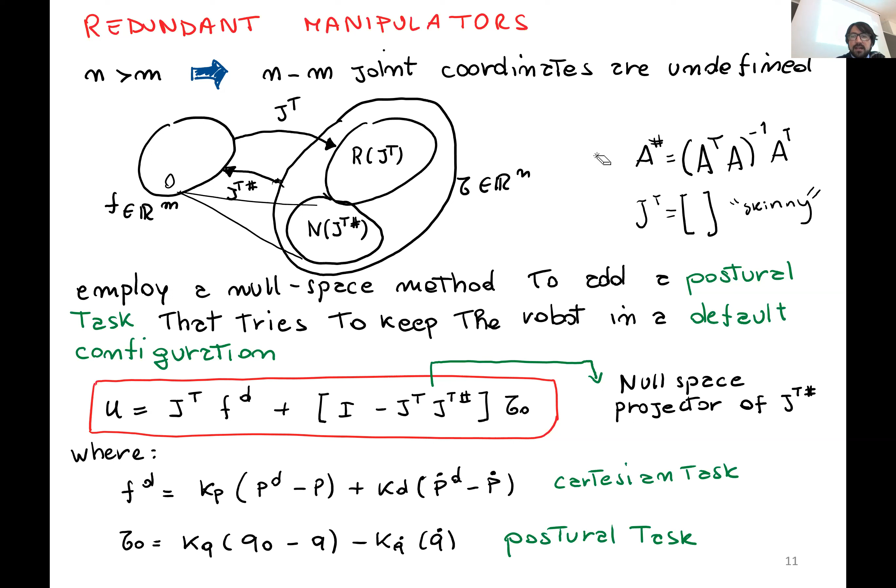Yesterday I showed you the pseudo inverse, but I made a small mistake with the one I showed you. I showed you the right pseudo inverse, which is correct if you're getting the pseudo inverse of J. But since J transpose is skinny, it's a tall matrix, then the pseudo inverse is the one you see here. So it's a left pseudo inverse.

And the way you realize this is because the column rank, the rank of the matrix, needs to be full. So it needs to be a tall matrix, and it's a left pseudo inverse because if you add an A here, then it needs to be full rank, otherwise this expression is not invertible. If you add an A here, you get the identity expression back. Sorry, let me close the door.

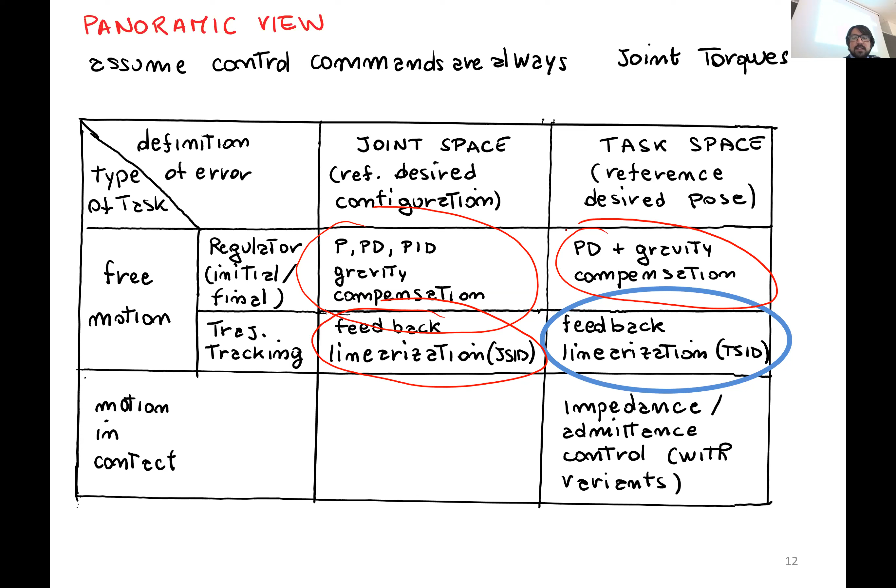So going back to our panoramic view, we already saw the PID family plus gravity compensation of controllers in the joint space, also the feedback linearization type of controllers in the joint space. And we saw yesterday up to the PD plus gravity compensation in the task space or Cartesian space. So today we're going to be talking about feedback linearization in the task space.

Remember that computed torque control is a specific type of feedback linearization for mechanical systems in Cartesian space. So we're going to work out the equations for computed torque control in Cartesian space. Let's go back to our joint space dynamics.

Here I'm not writing explicitly the dependency on Q and Q dot of matrices M, H, and our controller, just for simplicity of the procedure we're going to do afterwards, and because by now it should be obvious that they do depend on Q and Q dot. Let's start from the assumption that the number of task space variables is the same as the number of joint space variables. This means there's no redundancy in our manipulator.

First, what we need to do to achieve the inversion in the task space is consider the behavior of the manipulator at the end effector, in terms of the Cartesian dynamics.

So let's start from the definition of our transformation from joint space velocity to Cartesian or task space velocity through the Jacobian. If we derive this again, we get the acceleration of the end effector in the task space. Remember that we have the chain rule, so we have two terms here.

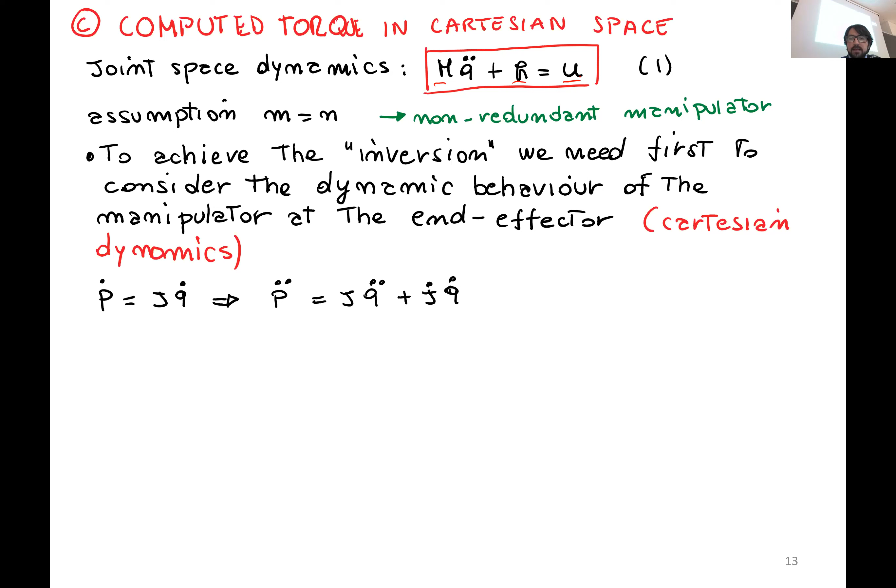And from here, we can actually isolate q double dot, the joint acceleration vector. Furthermore, we can use this expression to replace q double dot in equation 1 here on top.

Once we do that, we get this expression for our joint space, from our dynamics equation now. And we're going to start doing some algebraic manipulations such that we get to a specific expression that will make evident how the joint space matrix and the nonlinear terms behave in relation to the end effector.

So first we're going to left multiply by J inverse transpose. Here it's important that I mention we are allowed to get the inverse of the transpose because we have a non-redundant robot, so M is equal to N, J is a square matrix, and J furthermore is non-singular. This is only possible in cases where you have a non-redundant robot. So if we do the left multiplication of J inverse transpose, we get this expression here.

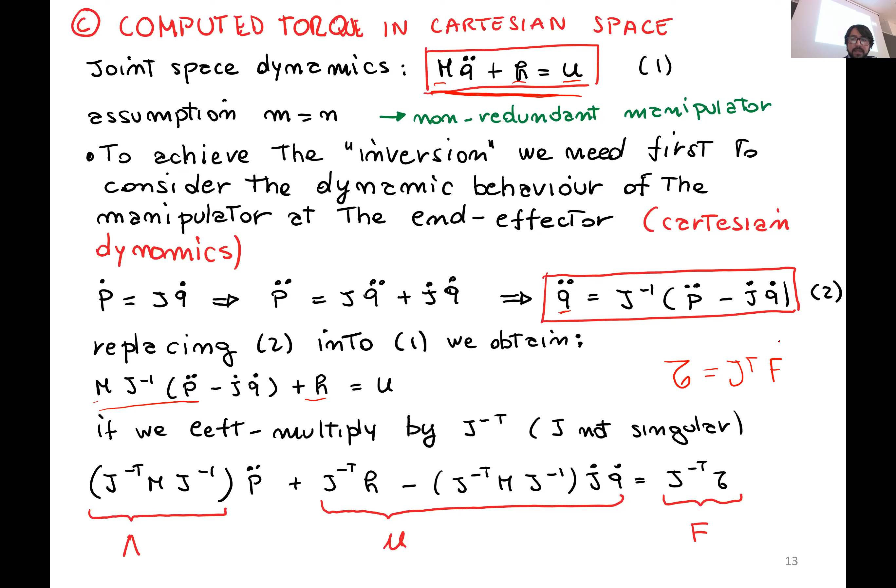So we have this expression here, which is basically just replacing with the terms. Now here we're making explicit the dependency on Q and Q dot. And this equation shows us the dynamics reflected at the end effector level.

This capital lambda, which is this matrix product, is the Cartesian inertia, which is basically the joint space inertia seen or felt at the end effector. Again, keep in mind that capital lambda will become singular if J is singular as well. This means that there's no inversion of the Jacobian, and this is the case for redundant robots.

Then we have this vector mu, which is the vector of Cartesian bias terms, the equivalent of the vector of nonlinear effects in the joint space, only for the Cartesian space. And then we have F as the Cartesian force. Remember that we're considering P as a Cartesian position in space. Later next week, the professor will do a lecture on orientation control. For now we're just focusing on position.

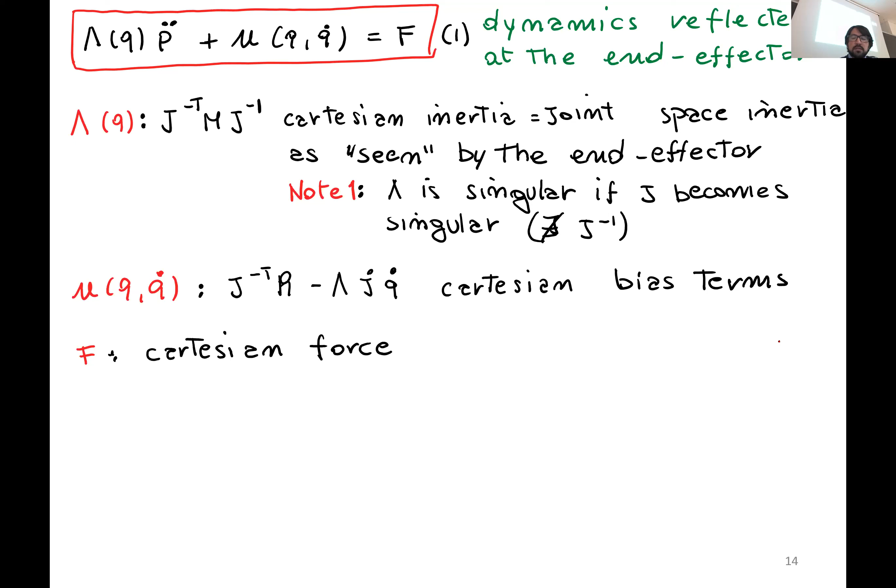So now that we have this dynamics expressed in terms of the end effector, we can apply the feedback linearization. And if we choose F to be the approximate Cartesian inertia matrix times an additional input called V, plus the estimation of our mu vector of bias terms, we now assume that we have perfect knowledge of lambda.

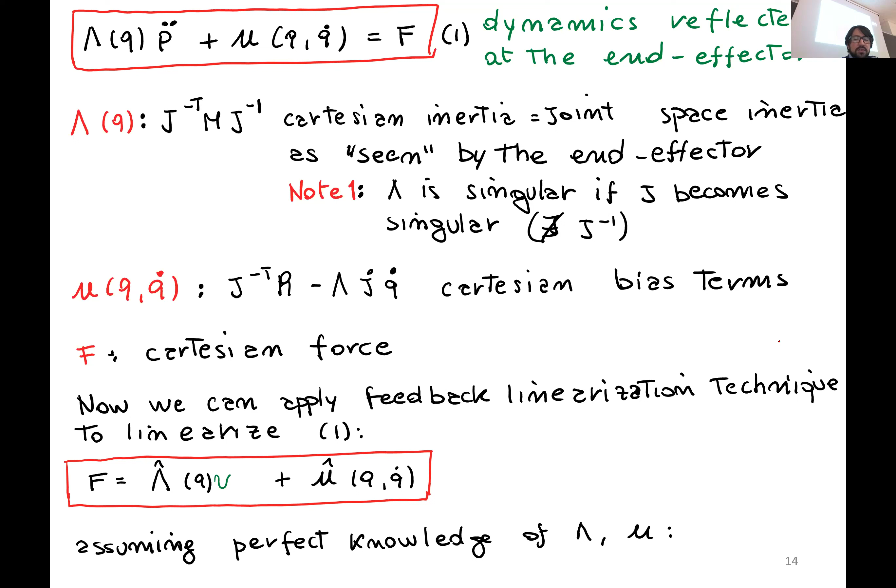These are our closed loop dynamics. And now, since we're doing feedback linearization, these two terms go away, they become zero. And then in the end we obtain this expression, which is a linear system, a series of double integrators.

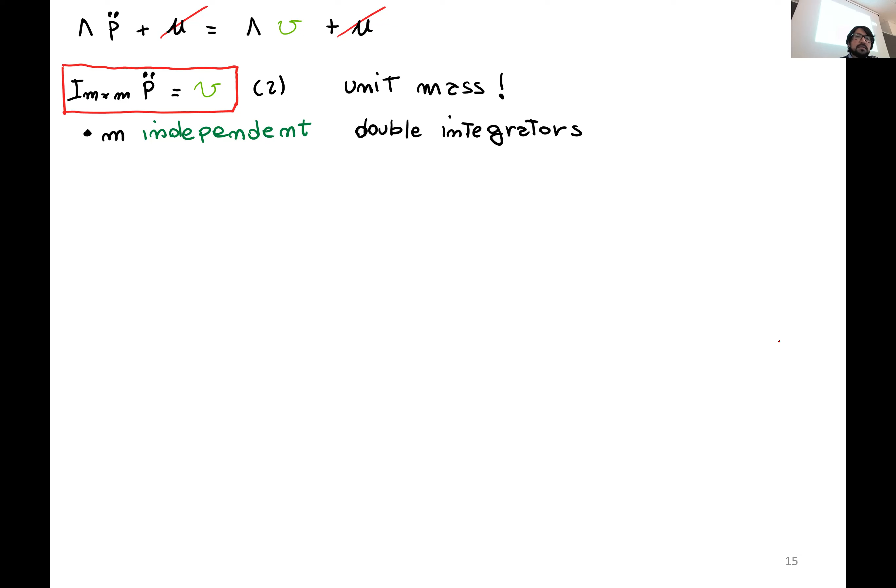Similarly to the ones that we found in joint space, and they are independent and they are unitary mass, as we saw also in the case of the joint space.

So as we did in the case of the joint space, we can design a stabilizing controller to reduce the tracking error in all of the double integrators. The main difference is that the size of M is the size of the task space now, and we're going to design a controller for all of the coordinates in the task space.

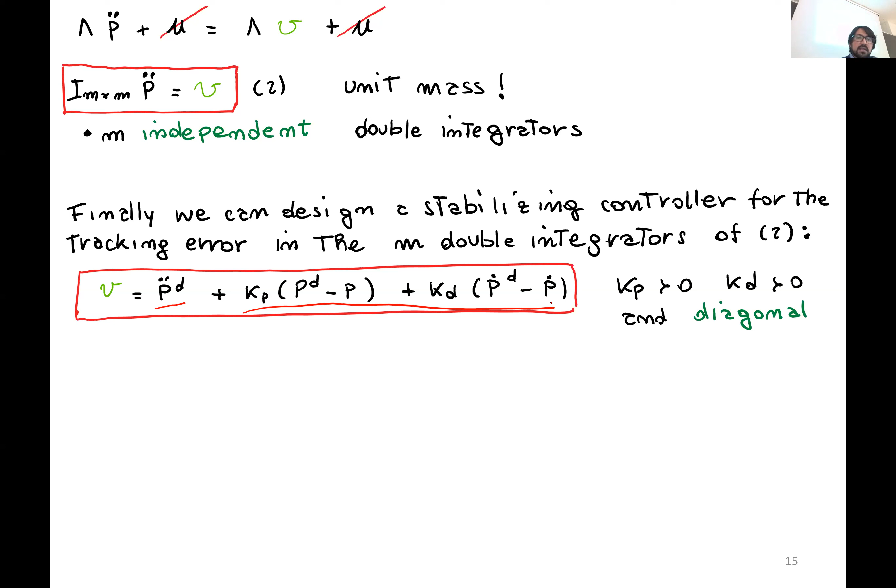And this is how we define, similarly to the way we did in the joint space, our control action with our desired acceleration and our PD term now in Cartesian space. And again it can be proven, you can prove stability in the case where Kp and Kd are positive definite matrices. Remember that P is a vector, so Kp and Kd are matrices which are positive definite and diagonal, so that you have a control independently for all the coordinates in the task space.

So this results in the closed loop dynamics, as you see here on the slide, which turns out to be the error in the acceleration plus a derivative term, a proportional term, and a derivative term here. And we're going to call this error E of X, EX, which is the Cartesian tracking error.

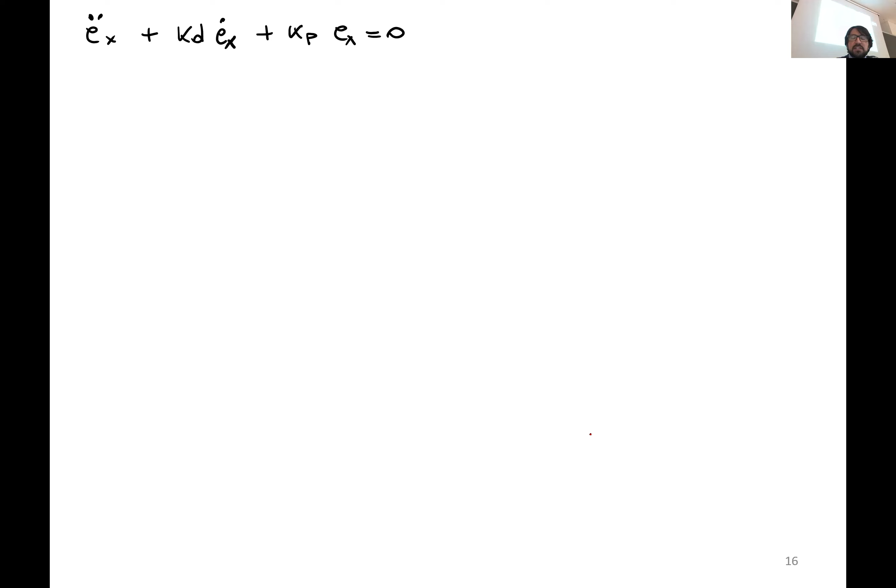So let's write again our equation now in terms of our Cartesian tracking error. And we can prove that this is stable in the case where Kp and Kd are positive definite matrices. And just as a general reminder, you can prove this using the second method of Lyapunov, and then you can only prove stability with Lyapunov.

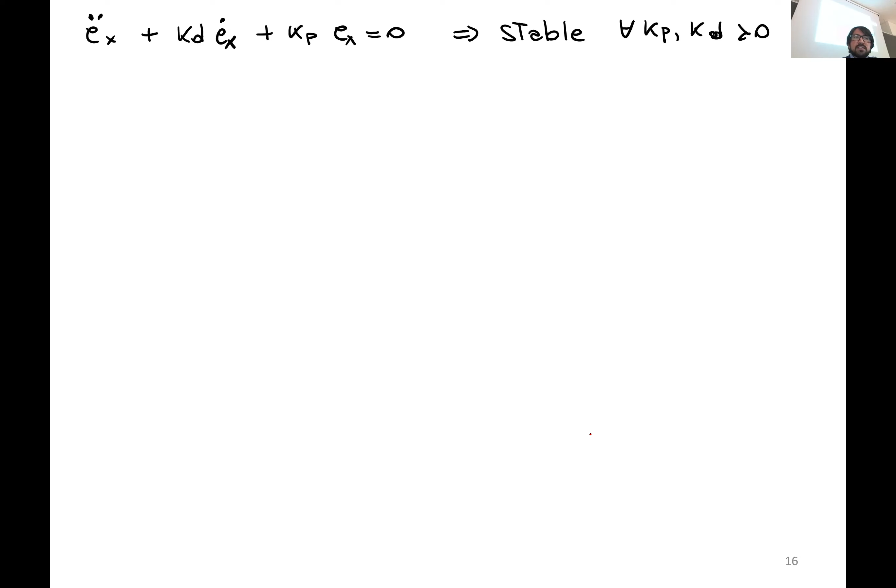You cannot prove asymptotic stability, because in the end, in your Lyapunov equation, you're going to get that the derivative is going to be negative semi-definite. So in order to prove asymptotic stability, you need to use LaSalle's invariance theorem, in case you're curious about it.

So the final control law turns out to be this one, which is our estimation of the Cartesian mass matrix, Cartesian inertia matrix, multiplied by our V, which turned out to be this term here with the proportional derivative action, and then our compensation for the nonlinear terms here, always using the current joint states that can be measured. We're missing a dot here, I just noticed.

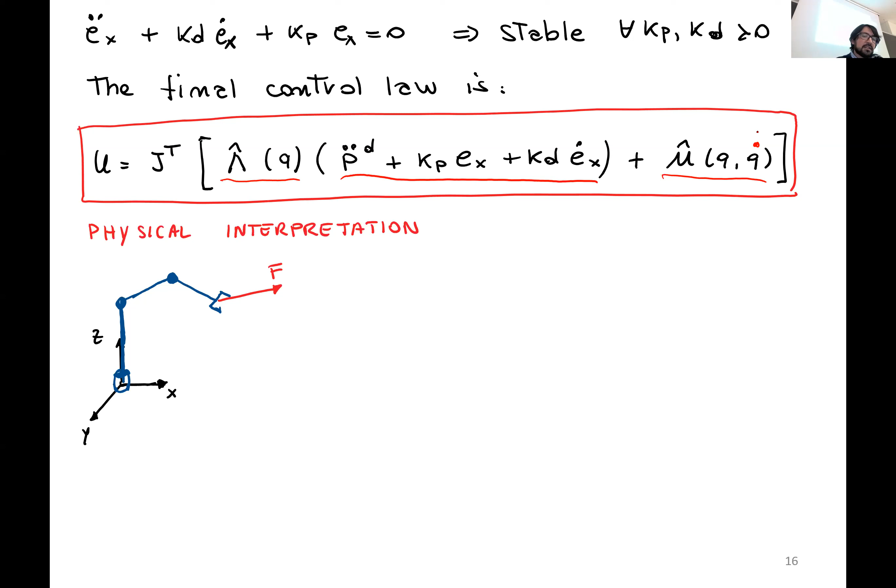If you don't use an approach in the task space that gets rid of the nonlinearities related to the task space, what's going to happen is that the inertia at the end effector is going to depend on the configuration of the robot. So it depends on the value of Q, and it's going to be variable in the Cartesian direction. So at the end effector, you're going to have different inertias in the X, Y, Z directions.

This is related to what we were discussing yesterday with the professor, that you're controlling basically with springs at each of the joints. Even if you get rid of the coupling, this inertia that you feel at the end effector is going to feel different depending on the position or configuration you're at. So if you apply a force in a specific direction at the end effector, it's going to accelerate in a different direction than the one you're pushing. In general, it might be the case that your manipulator is in a certain configuration where the resultant is in the direction you're pushing, but in general it won't push in the same direction.

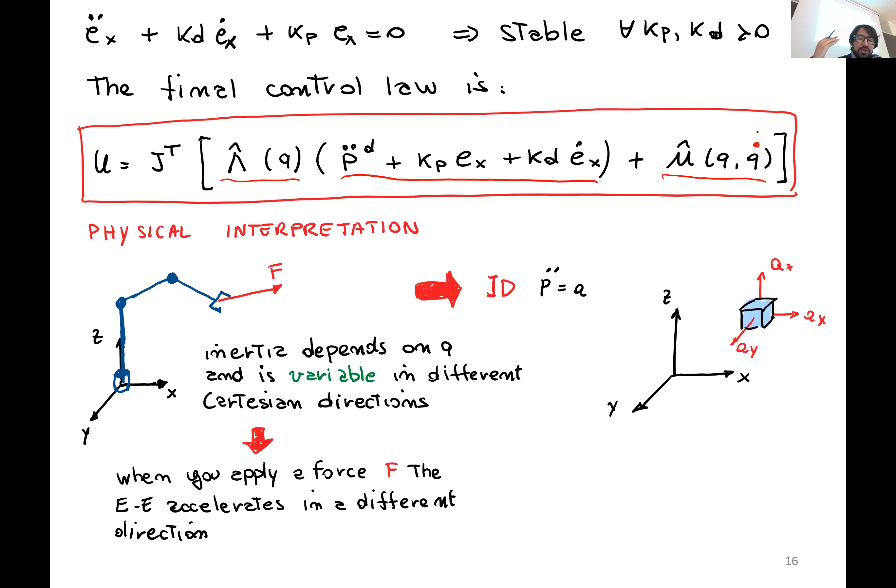Now remember that we mentioned that when we do the inverse dynamics or computed torque control, so when we do the feedback linearization, we get a unitary mass. Basically what we mean is that you get a mass at the end effector level with unit 1, and when you push that mass in a specific direction, it's going to displace in the same direction you're pushing. This is because you're compensating for the dynamics at the Cartesian level — I shouldn't say getting rid of them, you're just compensating for them in the control action.

So now let's see the case for redundant manipulators. We are in the case where you have more joint variables than task space variables, so our Jacobian is going to be a rectangular matrix, specifically a fat, long matrix. And of course we know that if the matrix is not squared, the inverse of the Jacobian does not exist.

So we can obtain an input-output decoupling, or linearization, or an input-output decoupling of our task variables, and also a linearization, but not for the entire state vector, if we replace our inverse transpose with the pseudo inverse of the transpose.

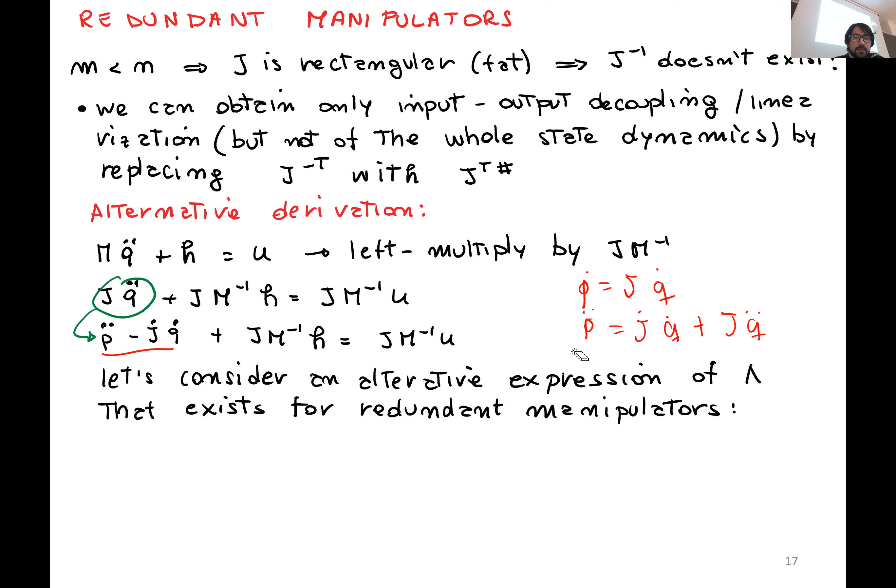So we now consider an alternative expression for capital lambda, and this one exists for redundant manipulators, which is this. We can say this exists because we're only taking the transpose of the Jacobian matrix, and this inverse is only defined if the Jacobian needs full row rank. So this is also something you need to take into account. This is our new definition of capital lambda. So if we left multiply our dynamics by lambda, we get this expression here.

So we have lambda multiplied by the acceleration, then you get lambda multiplied by the derivative of the Jacobian times the joint velocities, and then you get lambda times the Jacobian times M inverse, which is equal to what you see on the right hand side of the equation.

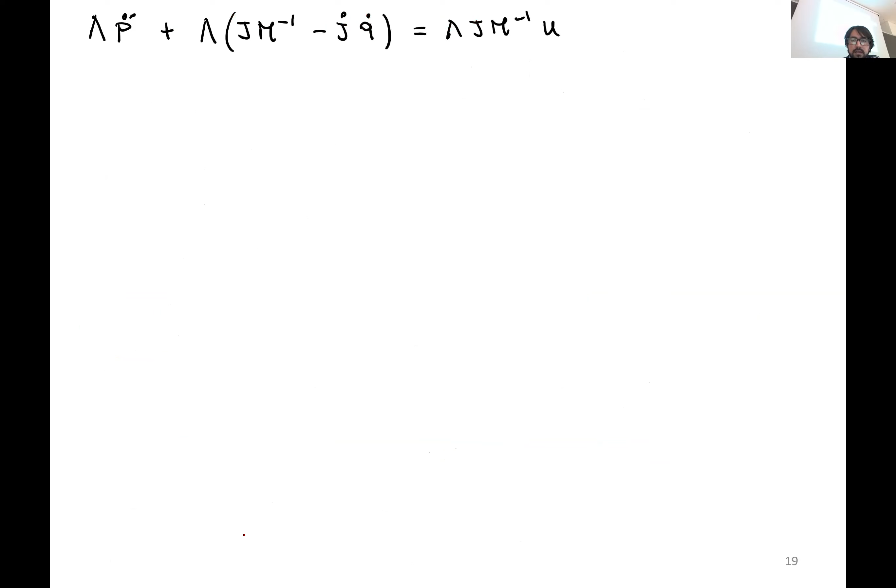So here we're rewriting again the same expression as at the end of the previous slide. This is our vector of bias terms, and lambda, it's the same as in the case before. It's our Cartesian inertia. And now let's take a look at what's on the right hand side of the equation.

Remember that lambda, we define it as this, as the inverse of the multiplication of these three matrices, and then I'm just writing J M inverse.

Recall that J transpose is a skinny matrix. So to take the pseudo inverse of this one, we need to use this expression. This requires that J transpose is full rank, full column rank. So in order for J transpose to be full column rank, J needs to be full row rank. And this is the left pseudo inverse of A.

This is called left pseudo inverse because if you multiply it by A on the right of the transpose, then you get identity. So let's write the left pseudo inverse of J transpose, and this is what you get: J times J transpose inverse times J. If we do this multiplication, you can already see if you add the J transpose on top, what we have here is identity.

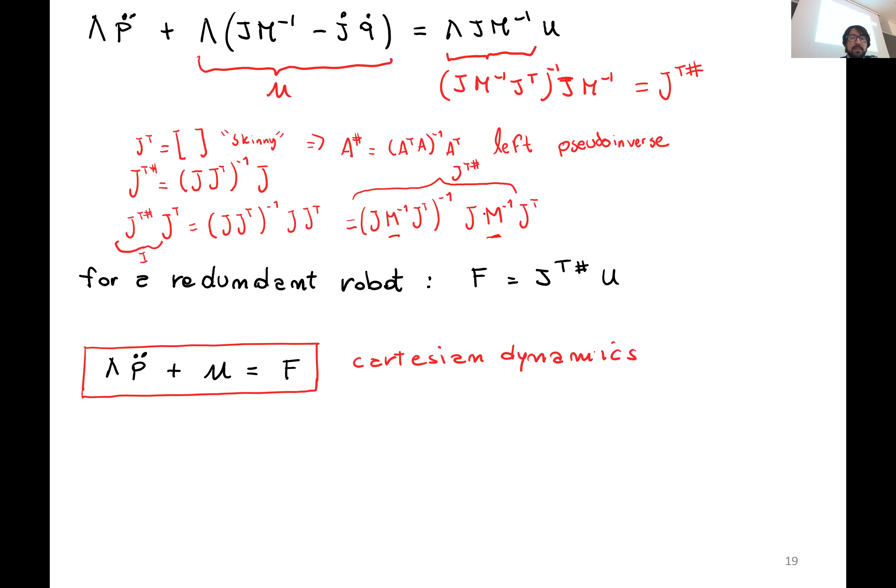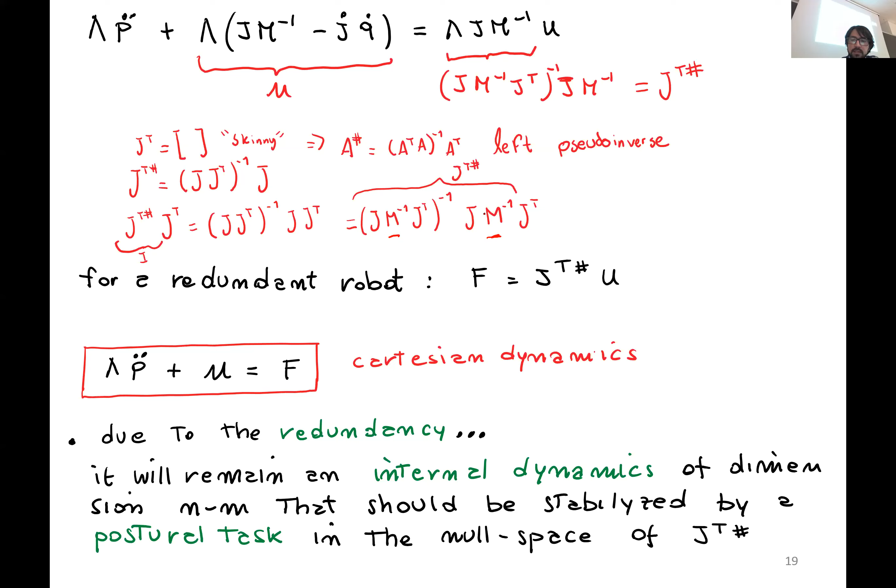And because we have redundancy, there's going to be n minus m joint torques that need to be stabilized with a postural task using the null space of our J transpose inverse matrix. So we use the torques that do not generate any force at the end effector. If you don't have any force at the end effector, there's no motion caused by those joints at the end effector level to control the redundant degrees of freedom.

So mainly what we want to do is find the portion of U that is in the null space of our J transpose inverse matrix. And what we mean by this is finding the input vector of the size of the joint space, so it's n, such that its transpose pseudo inverse times our input goes to 0. So this means that it doesn't generate any force at the end effector.

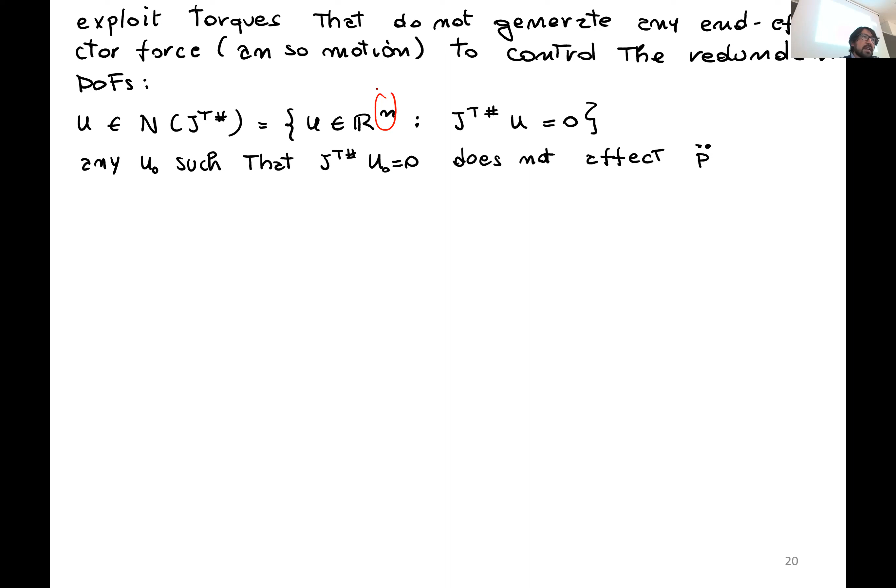So just giving it a name, U0, it's going to be the torques that when you multiply them by the transpose pseudo inverse, would not generate any acceleration at the end effector. So we break our control input into U plus U0. And what we want is that when you multiply this U plus this U0, at the end, you're going to get the same J transpose pseudo inverse U.

So we can use our null space projector, which is this one in this case. Remember that this is not identity because J transpose is skinny, and it's a left pseudo inverse. So just bear that in mind. And here we add a UP, which is going to be our input for a postural task.

So let's verify that J transpose pseudo inverse times U0 is equal to 0. If we multiply J transpose pseudo inverse by our U0 input, what we get is this expression here: J transpose pseudo inverse minus J transpose pseudo inverse times J transpose.

Because J transpose is a skinny matrix, this becomes identity. Then inside the parentheses you get J transpose pseudo inverse minus J transpose pseudo inverse, which is 0, multiplied by our postural torques control action, and this is 0. So we verified that we don't generate any force at the end effector level with this control input.

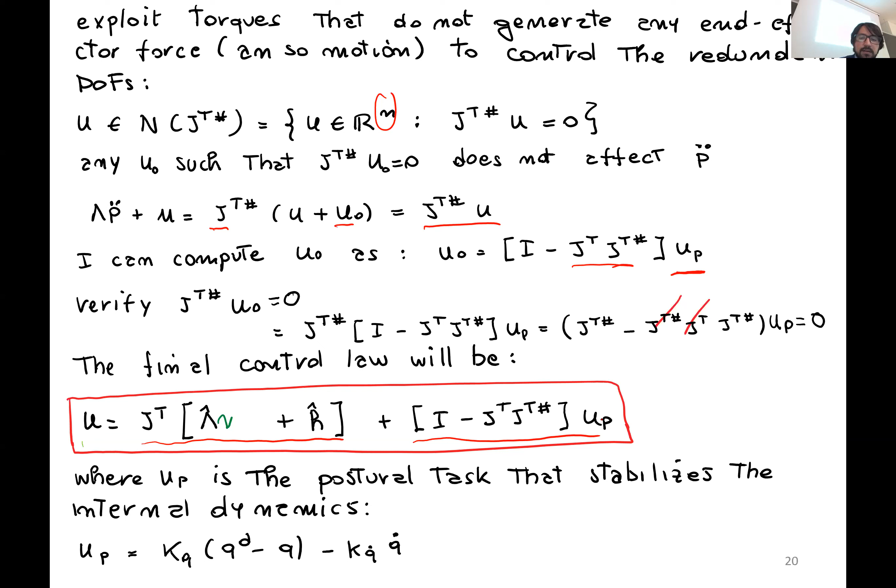And then we have here our postural task controller, which is using the joint torques that are not generating any motion at the end effector. As I repeat, UP is the postural task that stabilizes the internal dynamics of the robot, and we can define it like this, which is a PD action for the joints that are being projected by our null space projector.

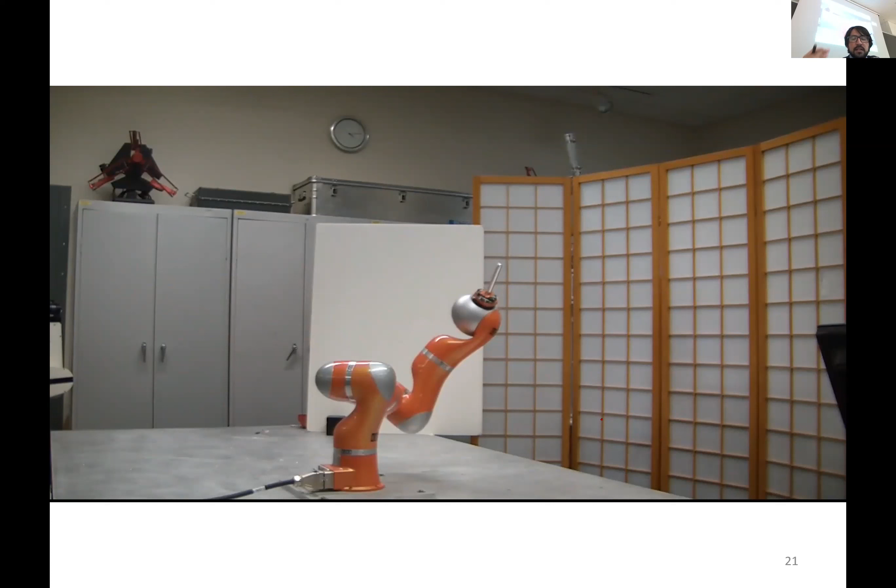So I'm going to show you a couple of examples. In this one, they're using the null space projector to generate a postural task, but they're also extending this to consider joint limits, so hard constraints on the joints. They're coming with a kinematic trajectory in a task space controller that follows a trajectory but also has a postural task.

So here you have the robot tracking a trajectory, and you see that in a certain way it's trying to keep the posture, but it also takes into account its kinematic limits. Then it's just repeating the motion, the circular motion here, and it should come to a stop now.

This is work from University of La Sapienza in Roma, from a former student of, well, a former collaborator of Professor Alessandro De Luca and Oussama Khatib. Then we have this other example in which the robot is commanded, the end effector is commanded to stay in place.

In this controller, what they're trying to extend is that at the end effector level they can differentiate between torques applied at the end effector. For example, if you're doing a machining task at the end effector, like polishing or finishing a small part, in general when you collaborate with humans, the human does the polishing and then uses the robot to relocate the part so that it fits.

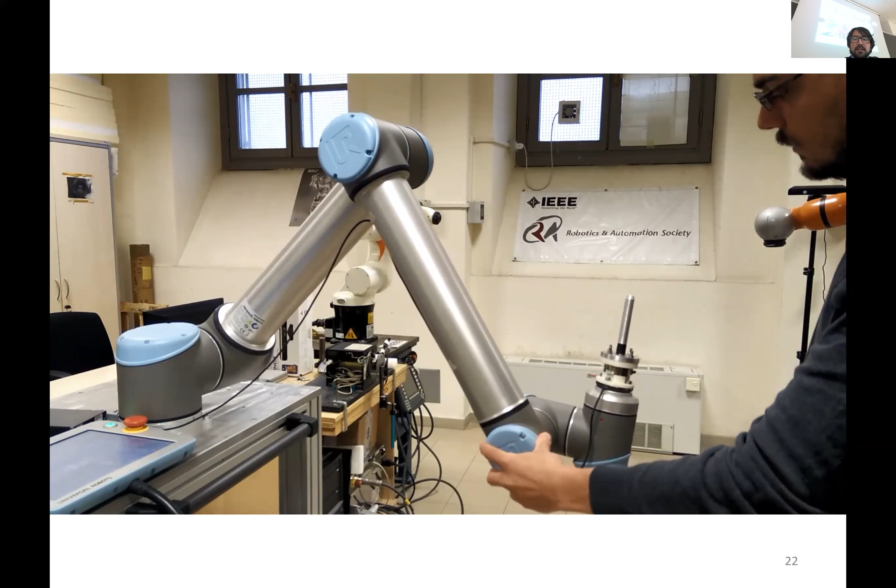So here you see that he starts by trying to move the end effector, and it's not able to move. Imagine that there's a part there, and then he's adjusting the posture of the robot by moving the joints. I think they're using something called a residual method that is able to identify the torques that are not playing a role at the end effector level. And this is it.

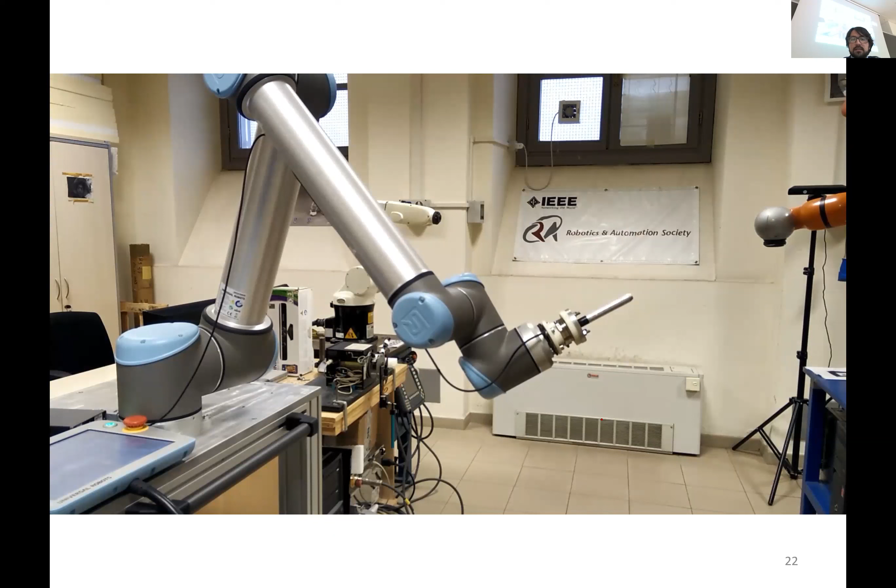So some remarks on Cartesian space inverse dynamics: you can achieve the decoupling in Cartesian space, and in the end we have this nice interpretation of a unitary mass that you can move in any Cartesian direction, based on the force that you're applying.

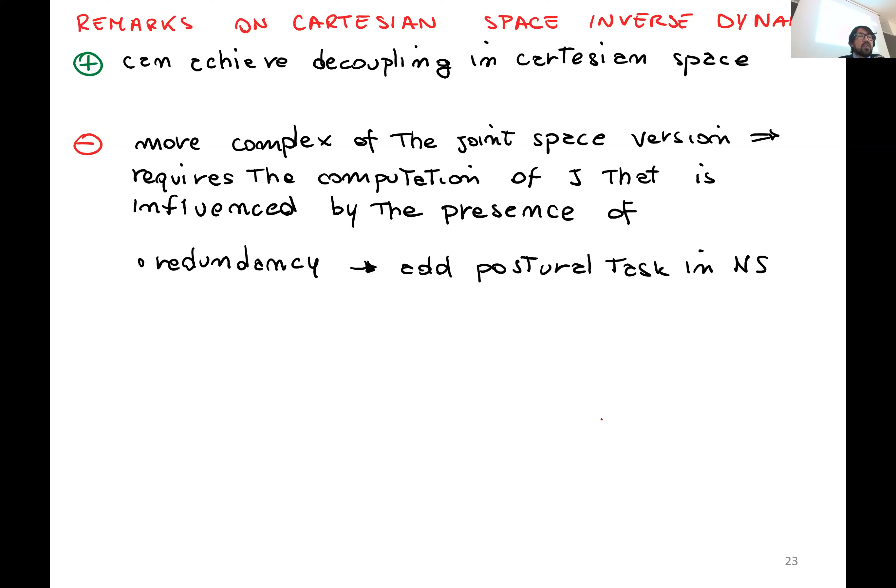However, as we noticed, it is more complex than the computed torque controller in the joint space. This is because it's influenced by redundancy, which can be solved, as we saw, by adding a postural task in the null space. Also, if there are singularities, then, as we saw in the lecture on inverse kinematics, we need to implement singularity robustness to avoid reaching these singular configurations or to stay far from them.

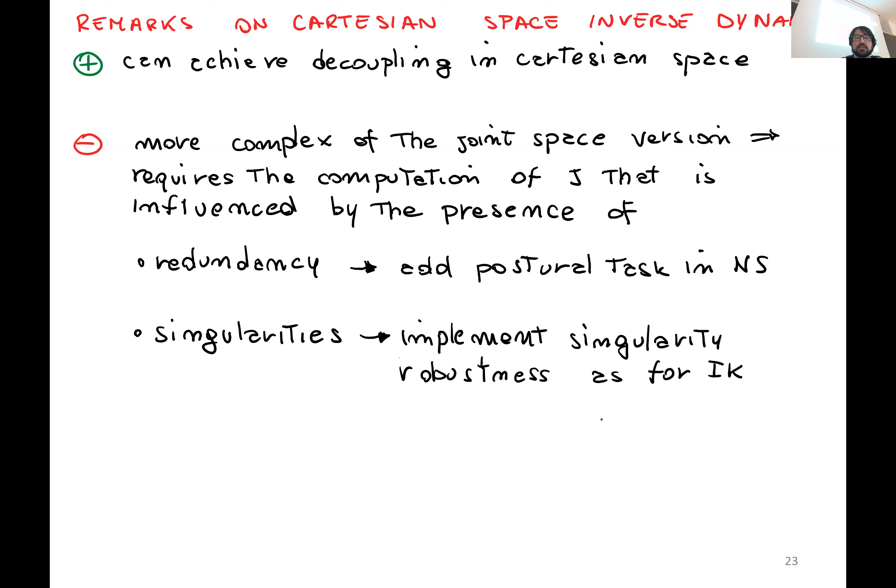So let's do a small recap on the mappings that we have seen so far. The first one, which is an easy one, is the mapping that you get by multiplying the acceleration by the joint space inertia matrix, which translates to joint torques. Then if you do the inverse, you go from joint torques to joint accelerations.

Then, if we look at the Jacobian, we can use it to map from joint velocities to task velocities. And in this case, if you take the derivative of that, we can use it to map from joint acceleration to task accelerations. And then we can also use the transposed Jacobian to map from forces in the task space to joint torques.

And now that we saw our Cartesian inertia, we can use it to map from task forces - so the inverse of our Cartesian inertia, seen here in the case of our redundant robot. So the inverse of this maps from task forces to task accelerations, and the Cartesian inertia, which is the inverse of the previous one, we can use to map from task acceleration to task forces.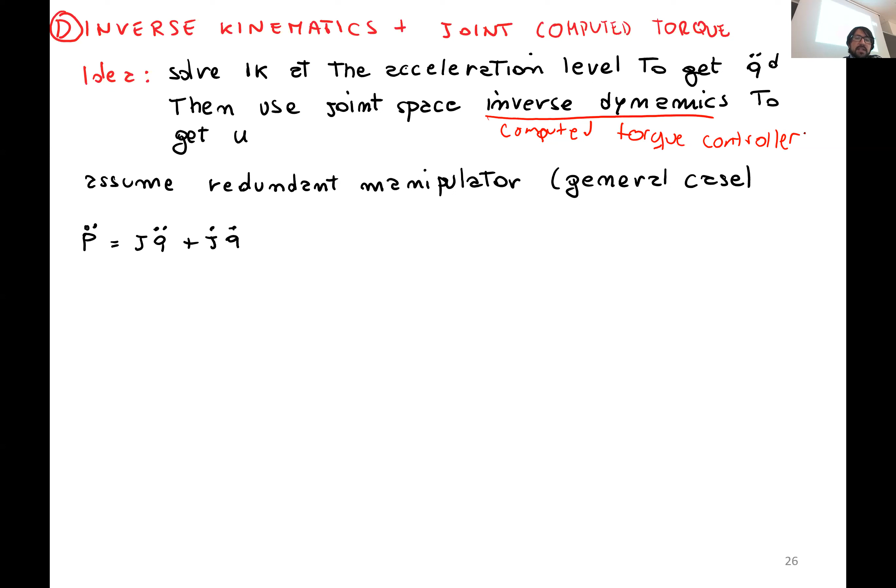So let's already start from the redundant manipulator case, and we can start from the Cartesian space acceleration, which is defined by this, and we can get from here. So we can use this expression to get our desired joint acceleration. Remember that here V, in the case when we always linearize the system, is equal to P double dot in the case of the task space.

Now, for those who followed Professor Del Prete's course, he calls V, actually, he calls it P double dot D, right? So this is basically just the equivalent that we're doing here.

So because we use V, it's a new control input that we're defining, we just replace this P double dot D with our control input. So just in case you get confused to see a D there, it's just P double dot D, which is defined by our P double dot reference trajectory plus our PD action.

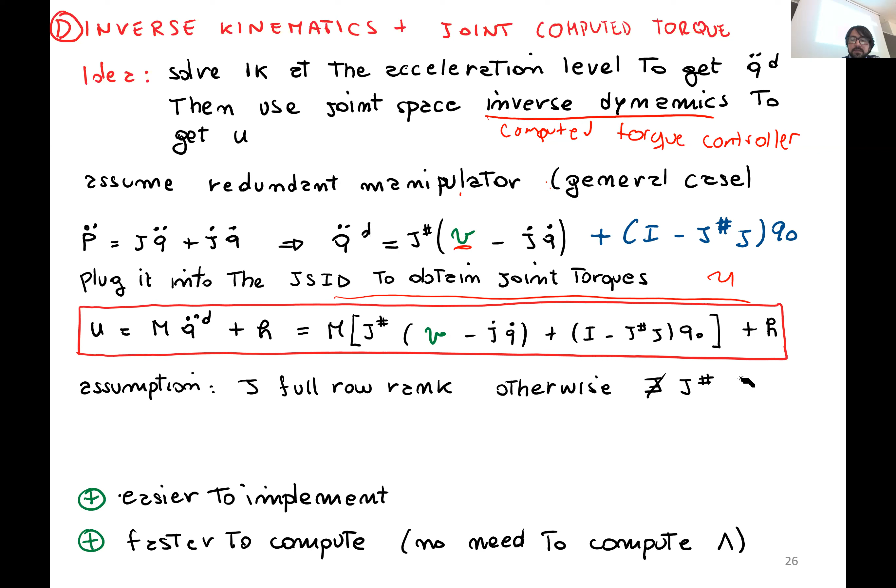So this is easier to implement, mainly because the equations are simpler, and it's faster to compute because you don't need to compute the capital lambda matrix.

So let's just verify the closed loop behavior of the controller. Here we have our closed loop dynamics. Remember that these are estimates, but we're assuming that we have full knowledge of the system just to verify the closed loop behavior.

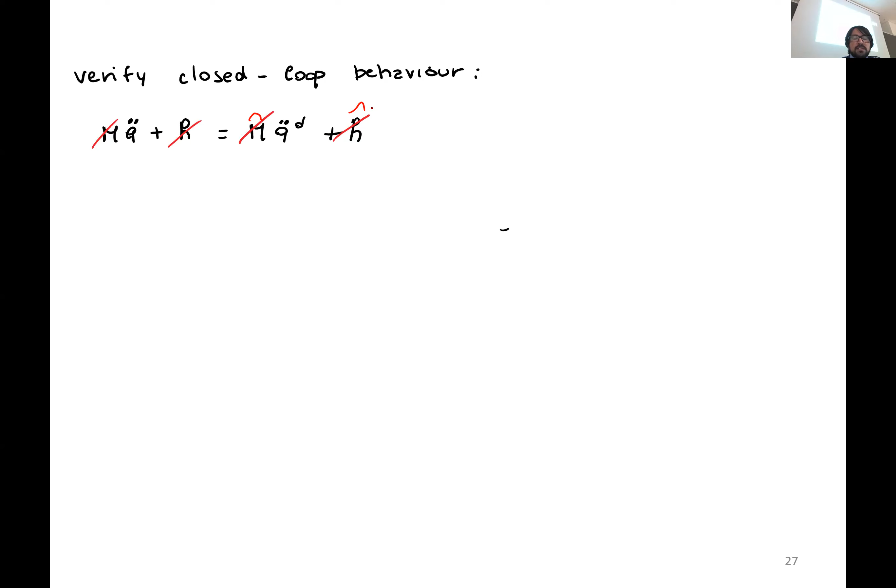So all of these terms go away. Then our Q double dot becomes this expression right here if we replace Q double dot D. And then if we work out all of the products that we have here...

If we first pre-multiply on the left, so pre-multiply is multiplying on the left, all of our expression by the Jacobian, we get this that we see here. Now here you see that it's a right pseudo inverse, so this will become identity. And then you get J minus J, so you will get 0 here.

And all of these terms go away. So in the end we get this expression right here, which is J Q double dot plus J dot Q dot, which is equal to V. And remember that this is equal to P double dot. So in the end we get the same as in the previous case when we worked out all of the equations in the Cartesian space.

Okay, so this finishes the lecture on Cartesian feedback linearization. Are there any questions?

Okay, so let's start. As I mentioned, I'm just going to give a bit of an introduction to interaction control methods, and then talk about a first approach that dates back from the 90s. More modern techniques are based on impedance or admittance controllers that the professor is going to show you on Monday. So let's start by talking about interaction control.

So up to this point, we have only discussed control strategies when the robot is in free motion. However, when the robot has to interact with the environment—by interaction we mean manipulate it, or avoid collision, or even interact with other robots, mechanical devices, or people themselves—there is an increased difficulty on the problem, and that is that sometimes we need to know how the object might behave related to our interaction, and modeling the object.

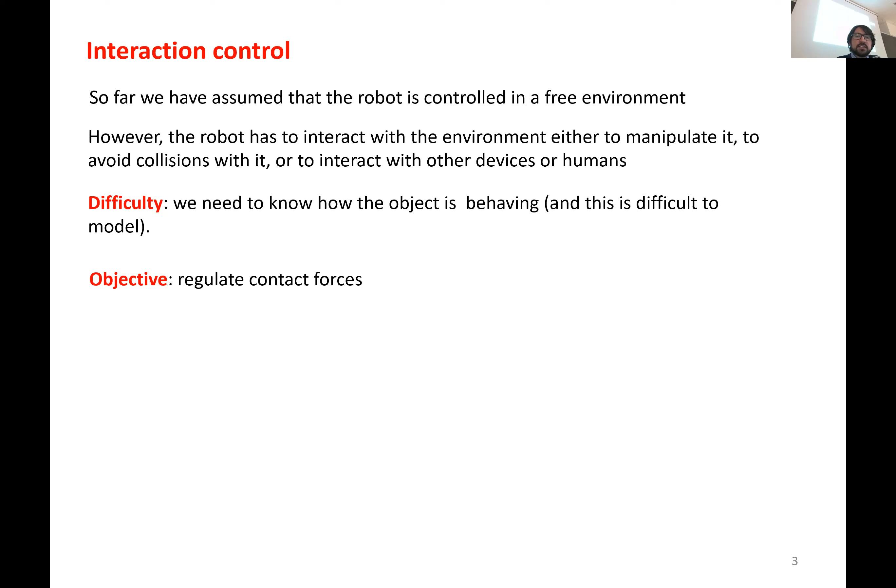It's a difficult problem, actually an open research problem in many groups that do robotics. For example, there are vision-based techniques, there are haptic-based techniques, and modeling the behavior of an object is in itself a difficult problem. So what we're going to try to focus on now is how to control or regulate the contact forces that we have with the environment, and some applications related to interaction control of robots.

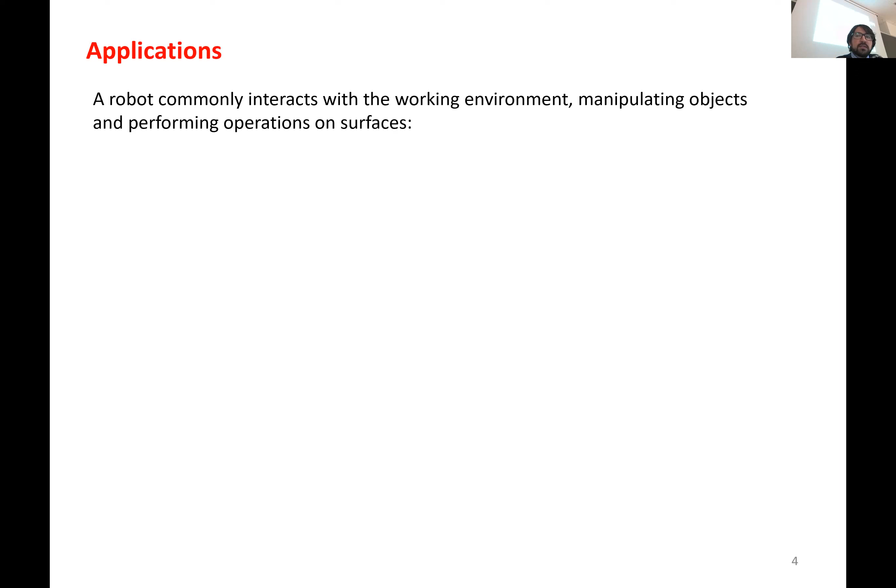This is when manipulators are performing operations on surfaces. These operations could be drilling, grinding, or deburring. Deburring is the operation where you remove the metal or plastic shards of parts that are just made, since they're very sharp. These are called burrs, and deburring is removing them, usually with sandpaper or polishing material.

There's also surface finishing and polishing that you can do with a manipulator.

Now let's talk about assembly tasks. I couldn't find a good video about it, but there are some interesting insights on how a robot is able to perform relatively complex assembly tasks. And a very hot topic in modern robotics nowadays is human-robot interaction.

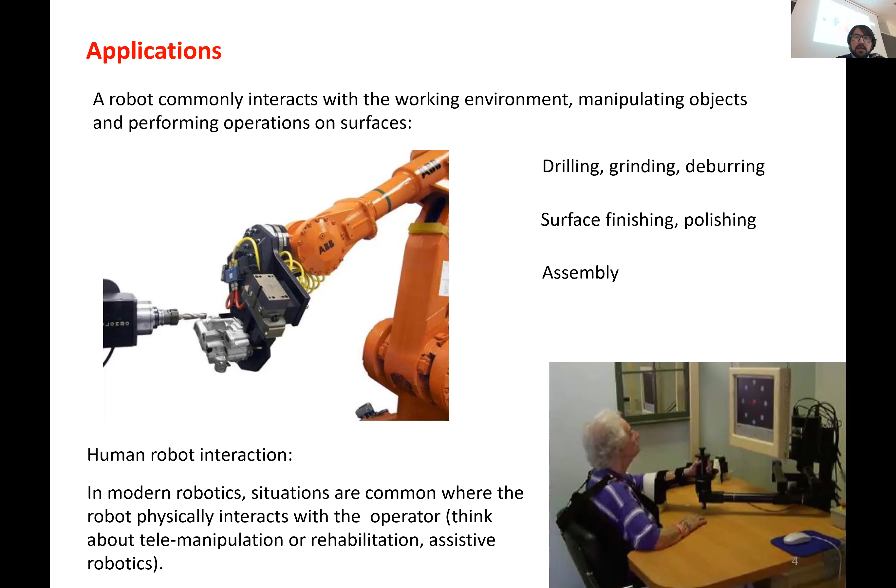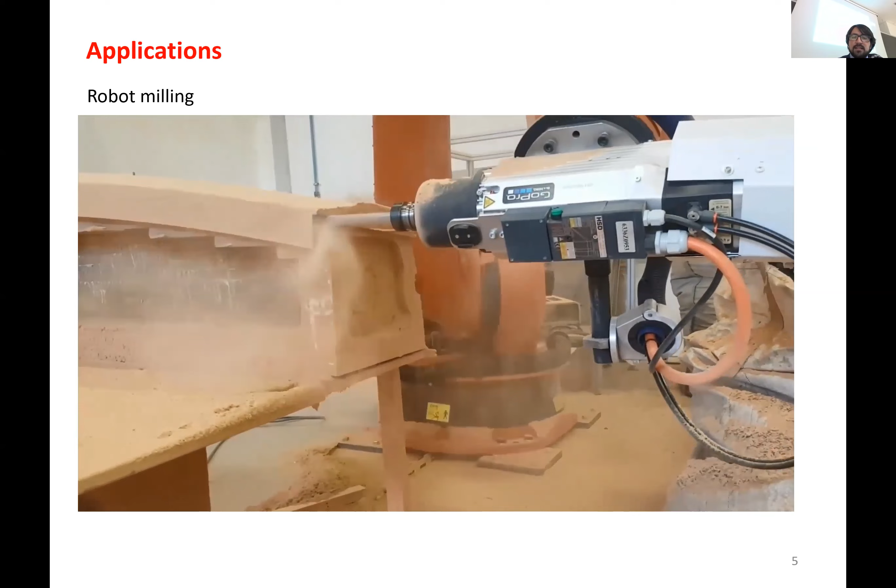Here is an example of a robot milling. This is a huge robot, and I think it's a PR video for KUKA, showcasing the robot milling an entire canoe. There might be better ways to do this, but it's meant to showcase that with good interaction control on your robot, a manipulator is versatile enough to adjust to different orientations to perform the milling actions.

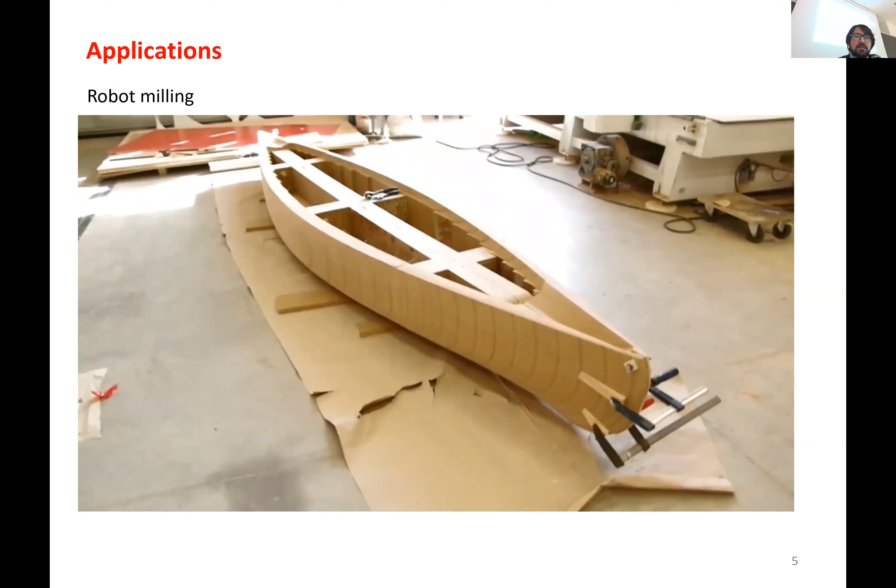And to finally finish the canoe, at the end they show it completely finished. Of course there might be a gap between the previous step and this one, but some of the pieces were done by the manipulator.

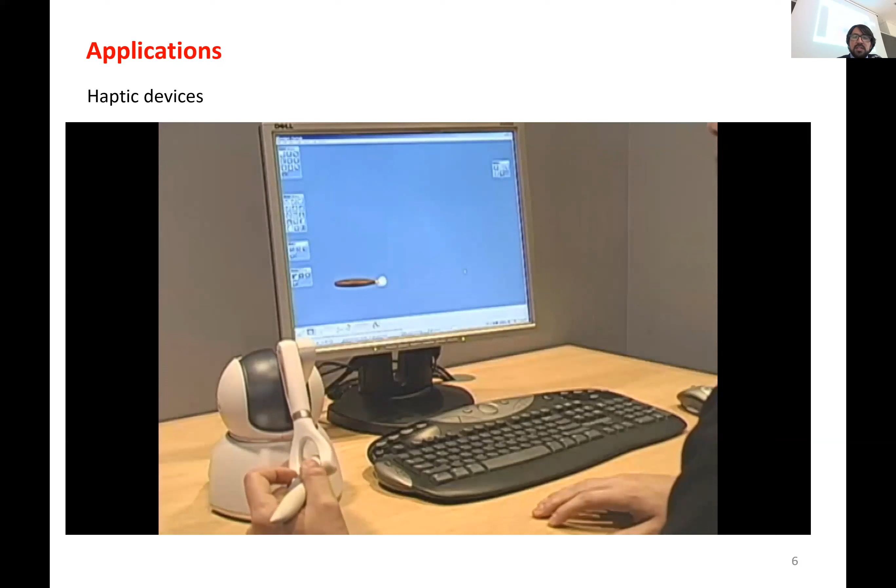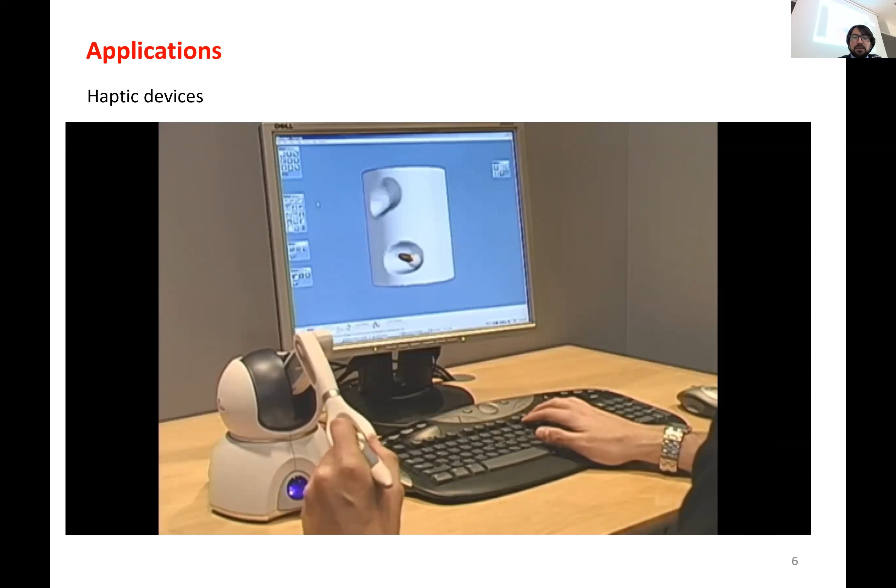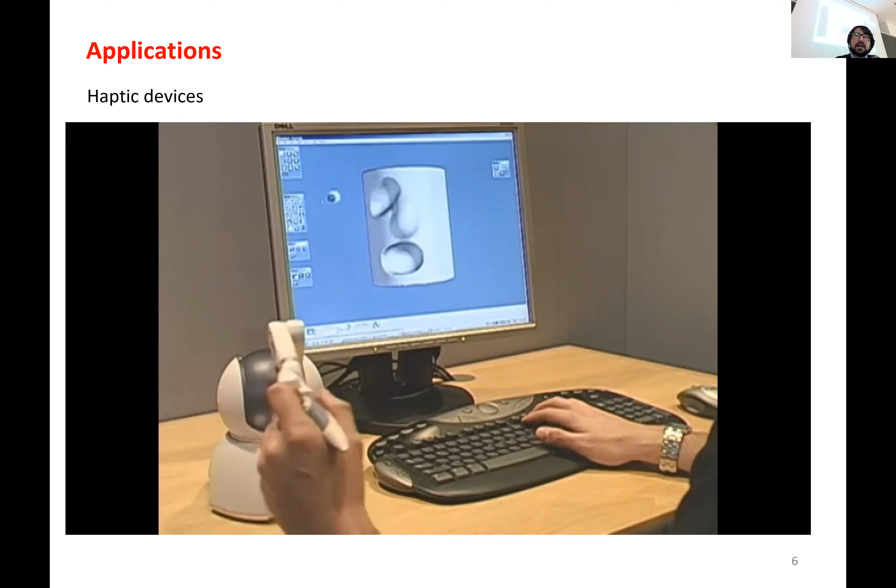Another example of interaction is related to haptic devices, done through a combination of impedance and admittance controllers. In this video, somebody is designing a 3D object with a device called a phantom haptic device, and the operator feels the feedback of force as it touches the object. This is mainly used when you want to transmit feedback to the operator, based on admittance control. When you want to act on the environment, you usually use an impedance controller.

As mentioned before, the use of haptic devices isn't only for interacting with 3D environments, but also to get feedback from, say, a remote robot interacting with a surface that might be soft or hard, so you can understand what kind of surface you're dealing with. In the end, you need to perform this kind of interaction control strategy.

I'm showing you this picture because I couldn't find a good video of it, since it's really hard to visualize. This is a dentistry simulator, used at the University of Pennsylvania, developed by a company named Moog, which also developed the actuators on our newest robots, so they have a very large area of expertise. This specific system creates a 3D hologram, and you can see the person on the left wearing a pair of glasses.

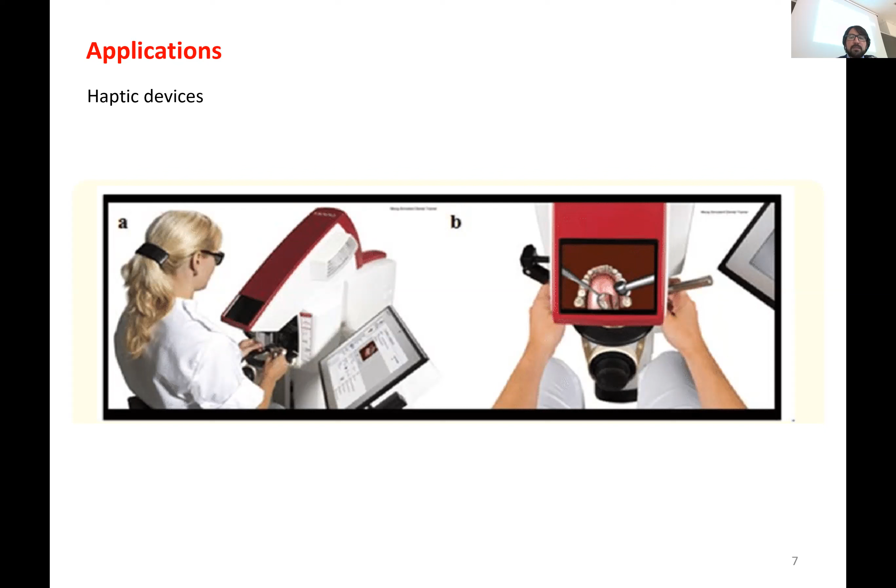So those are 3D glasses, like the ones you have when you go to the movie theater to watch a 3D movie. Then there's this hologram that you can interact with, and the device is very similar to the Phantom. It makes you feel as if you were interacting with the teeth. I had the opportunity to test one of these during my master's, and it really feels like you're going through the teeth. Now, when you're out of the hologram, the illusion goes away, but it's really well made, and now it's used in some universities to teach dentistry, to simulate, instead of going directly to the patients. The first step is solving the problems in the simulator.

So another application for impedance controllers is related to mobile or legged robots. The robot is constantly in contact with the environment, so you need to actually compute the forces that you want to get, the ground reaction forces that you want to generate. So basically what controls the robot is not necessarily your joint torque, it's the force that you apply on the ground.

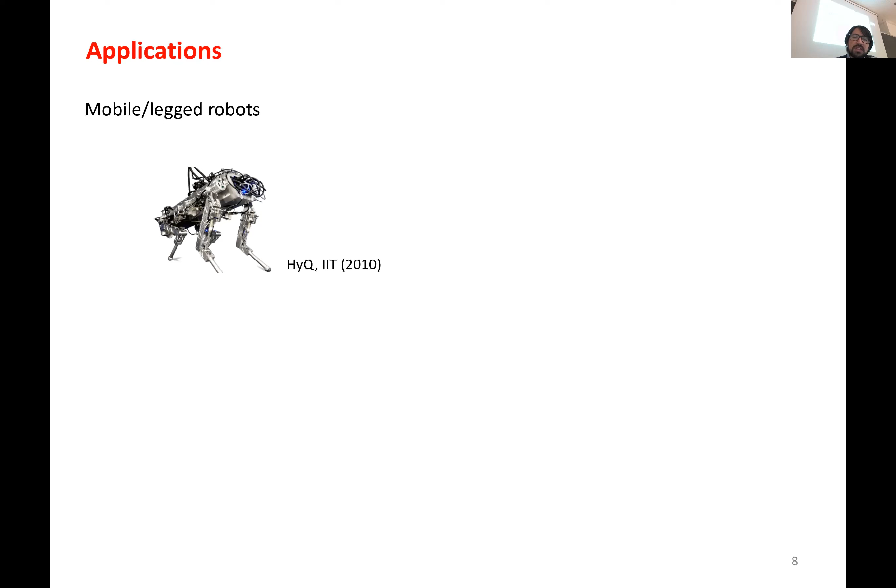So we use these kind of strategies on our HyQ robot that dates from 2010. And this is also used in the ANYmal robot from ETH Zurich. And the newest robot of them is ANYmal C, which is the one they are starting to deploy to industrial plants. It also uses impedance control because it became the standard on legged locomotion in general. We also use these kind of strategies in our newest robot, HyQReal. And Boston Dynamics also uses impedance control and interaction control to regulate the ground reaction forces that the robots feel with the environment.

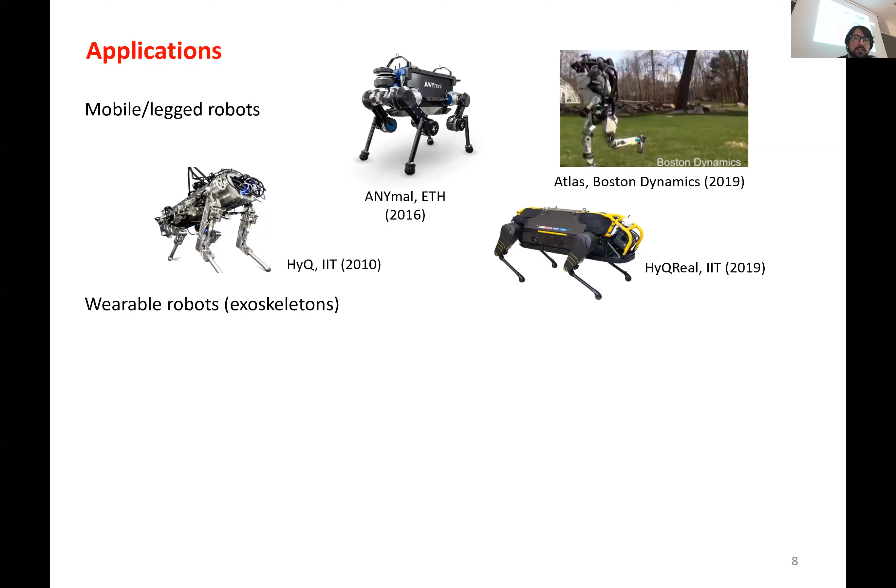So another basic application is related to wearable robots, and one example is exoskeletons. There cannot be a more evident device for human-robot interaction than an exoskeleton, because the robot is directly in contact with the person. So you need to regulate the forces. You don't want to exert a very large torque on a specific joint because you might harm the person using the device. So interaction control techniques are also used in exoskeletons.

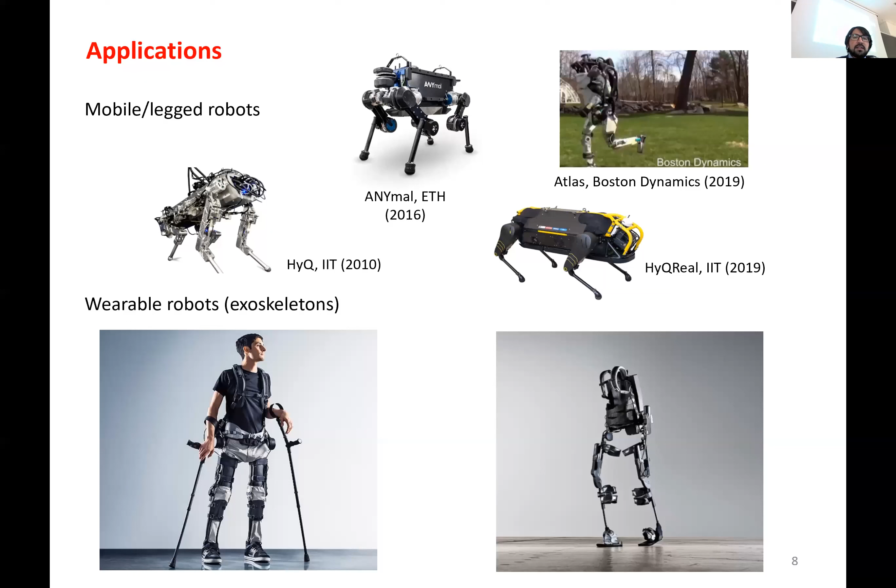So there are many tasks of interest and objectives that you can have during a specific motion, and they usually require you to accurately follow or reproduce the desired trajectories at the end effector. Sometimes these trajectories can be done at high speed, and these trajectories can be defined at the surface of the objects. We're going to see some examples later on.

You also need to control the forces and torques that are applied when you're in contact with the environment. You can have a low or a high stiffness. Low means you have a very compliant behavior, so you can basically push the robot and it will move in the direction in which you're pushing. Or you can also have a rigid stiffness, and if you push the robot, as we saw at the end effector of the previous video, you won't be able to move it if you have a rigid behavior.

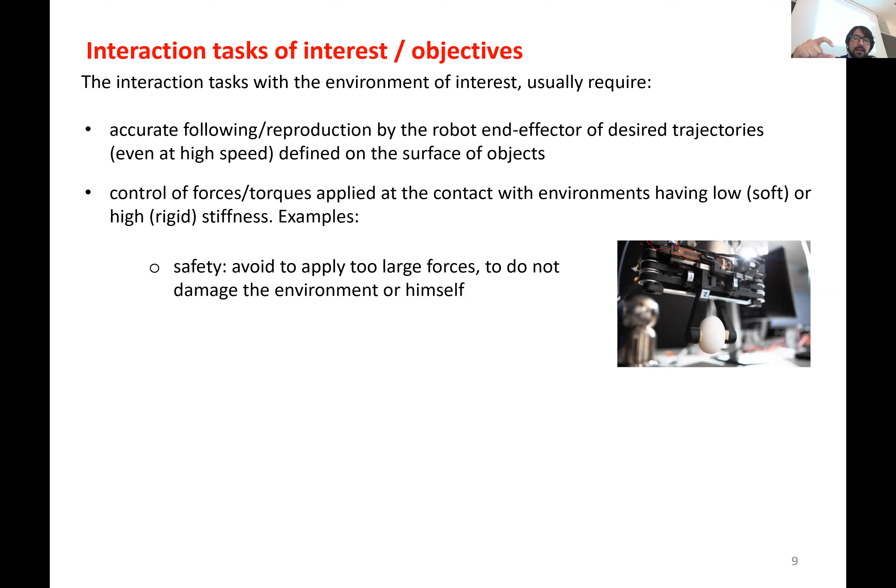So some applications, some examples: you want to control your forces so that you don't damage the environment or the robot itself. Here, for example, we have a robot holding an egg, which is a task that requires precise control of the forces and torques that you're applying on the egg itself.

Another example in which you need very precise control of forces is when you want to apply forces or torques in a specific direction. For example, if you're turning a crank, you cannot apply force in just one direction; you need to constantly change the direction of the force. You can also see this when a robot is trying to open a door - you need to apply the force in a specific direction as well.

And then for balancing tasks, for example in legged robots, when you're moving - remember the example when we were doing joint space and we started seeing gravity compensation, I showed you the video of HyQ walking, and when it had the weight on, the center of mass was displaced, and it adapted the location of the center of mass. Actually, what it's doing is controlling its ground reaction forces to reach a certain orientation, and then obtain balance based on the ground reaction forces that you're applying on the ground.

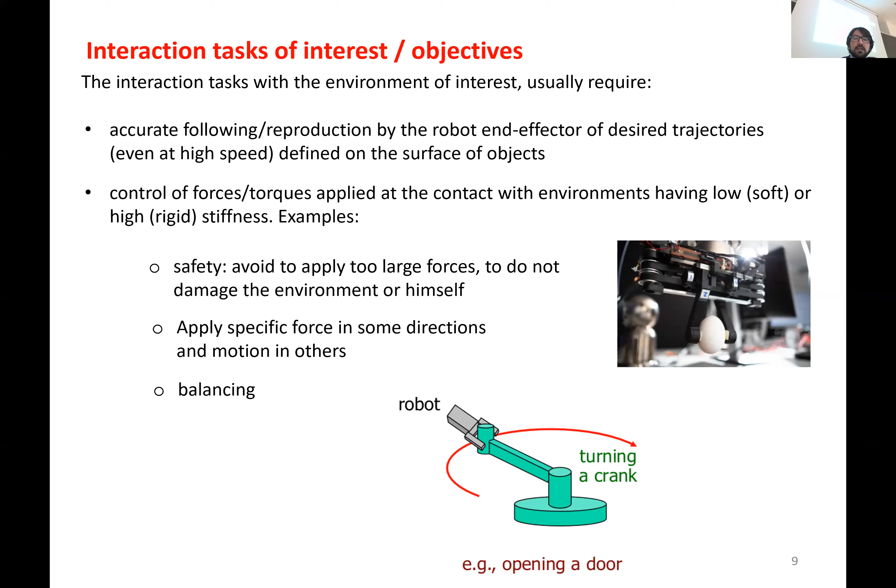So one task that requires both position and force control is following a contour. For example, you have a workpiece and you want to polish it, so you need to follow a specific trajectory around the workpiece, and you also need to apply a certain force. So you need to measure both force and position at the end effector level.

So here we have two examples: one is finishing of a washstand, and the other is finishing a metal cabinet on the right. You'll see that you need to follow a specific trajectory, but you also need to apply a specific force in the perpendicular direction of the motion.

Using purely position control, as we do for motion, can lead to problems. This is also related to the fact that the motion is not free, it's constrained by the surface itself. If you don't take this into account, you may damage the part or the robot if you don't have knowledge about the environment.

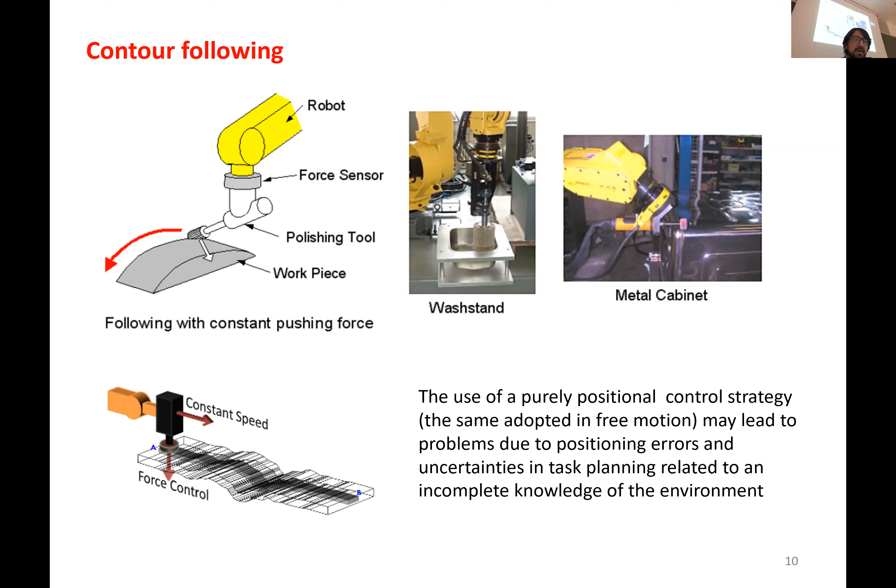Of course, if you have full knowledge about the environment, you can design a trajectory right on the edge, but this is not a good approach because there are always disturbances, there are always uncertainties. So it is better to also have an extra feedback related to the force and the torque.

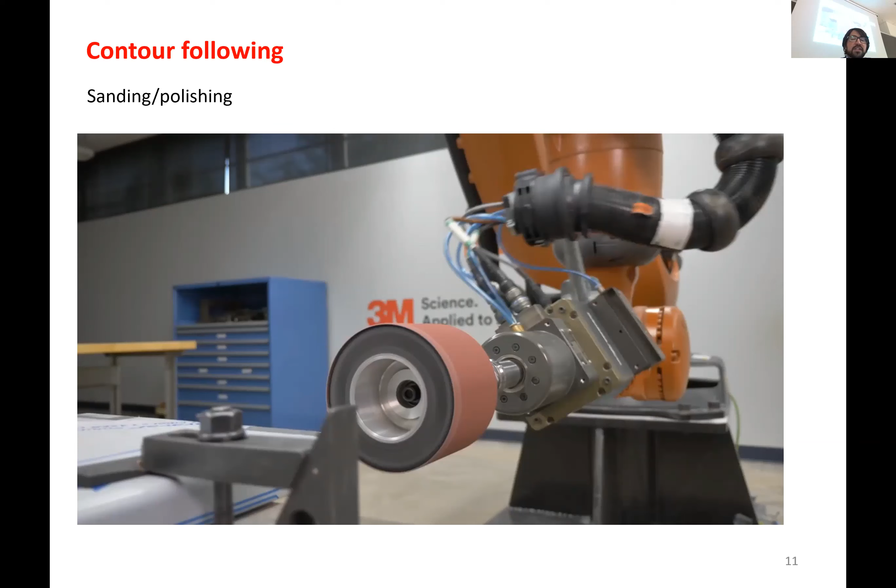So here there's a sanding and polishing task with a robot. Here you'll see that the robot first is, so here it's polishing, polishing a work table.

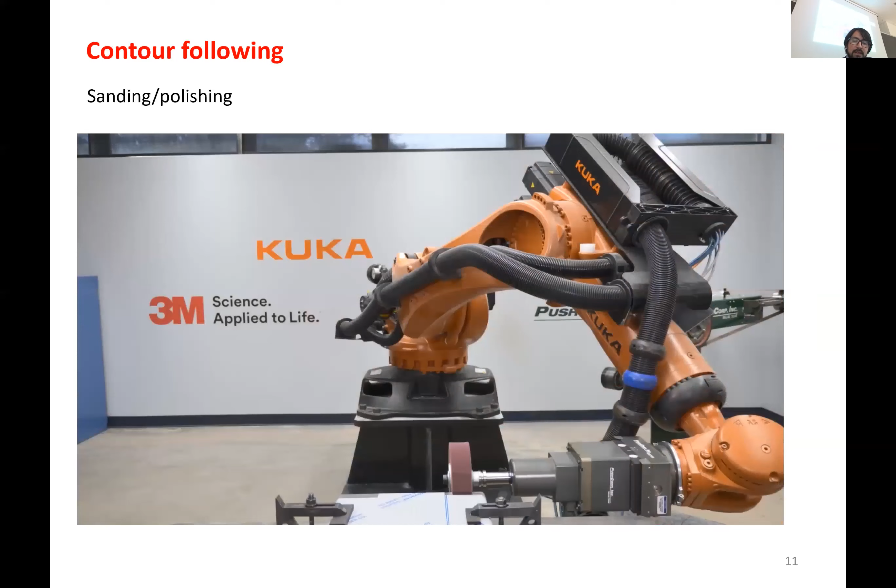These ones actually require very low tolerances, this kind of tables, because these are the ones where you perform experiments. We have one of these in our lab, and we use it to calibrate rotational torque, rotational motors, so of our joints.

If you don't have good tolerances of this kind of tables, you can have offset torques generated by the screws on the table. For example, these small holes are used to hold things on them. And if these are not properly polished, you might have a constant torque because the screw is not well aligned.

And when you do calibration, it's very important that you know where all of your torques are coming from.

So another example is an assembly task. This is very interesting because this is an assembly of a gearbox. The first step is to insert the inner part of a planetary gear into the outer part of the same gear. One way to find out if the teeth of the gears are matching is by measuring the force when you apply a certain motion. Once you find an equilibrium between the two forces, it means the piece is properly assembled.

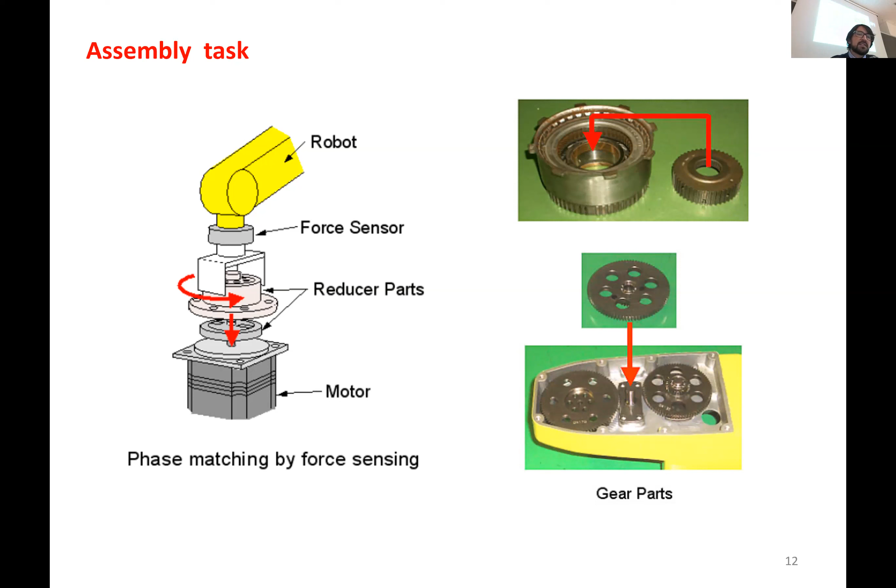The other thing you can do is have a collaborative task, where you have a person placing the pieces in the right position for the robot, and the robot is just in charge of completing the assembly. So somebody takes the pieces and the robot completes the assembly.

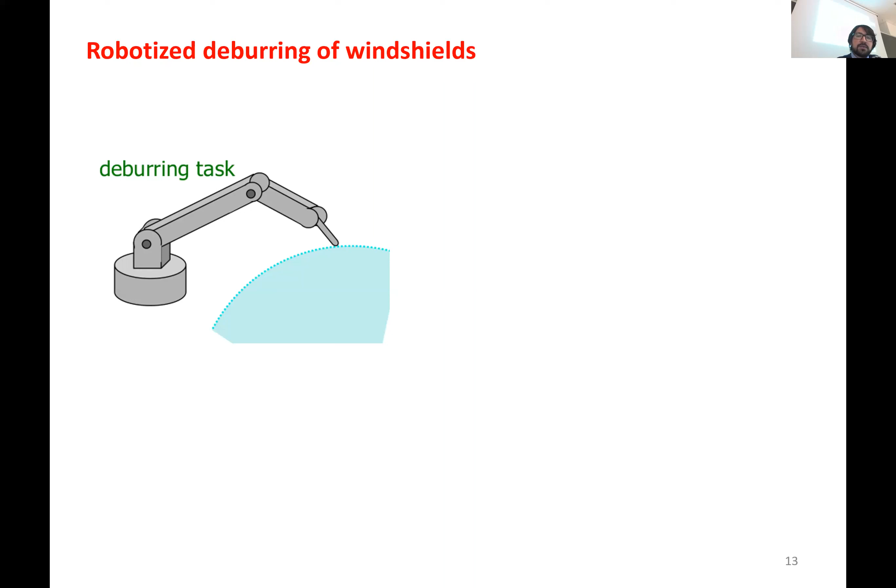Another example of this is doing a deburring task. What I explained at the beginning, deburring is removing the metal or plastic shards of certain pieces. Here's an example from the Excellence Center in Cecchina, Rome, in 2002, a collaboration with the company ABB. Here it's also a task where you need to track a trajectory in position, but also control the forces so as not to damage the windshield. So this is the deburring of the windshield of a car.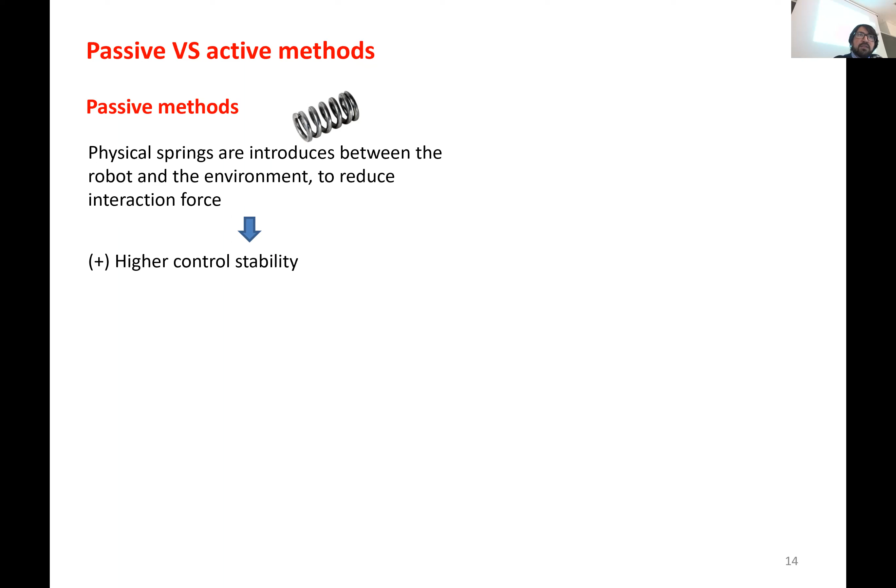So we can have passive or active methods when dealing with interaction. Regarding passive methods, we add physical springs and dampers to our system, and they can reduce the force in the interaction, and they increase the stability of the controller, because you're basically relieving the responsibility of the controller to a physical element in the structure of the robot, and you can have an infinite force bandwidth in the controller.

However, when we're talking here about flexibility, it's in terms of, let's say, changing your stiffness, like the flexibility to execute different tasks, not the flexibility of the link itself.

And the problem is that once you assemble a robot with a spring and damper array, if you find out that your stiffness is not the right one for a task that you're doing, then you would need to disassemble the robot and replace the spring and damper array.

The other way that we can do it is using active methods, and this is using feedback control techniques. So the one that we're going to see today is direct force control, and it employs feedback directly at the force level.

This requires for you to know what is the force at the end effector. Generally, you measure it with a force sensor, or you can also estimate it, but that makes the problem a bit harder. So you require a force sensor at the end effector, and there are some stability issues related to it. It also depends on the formulation that you use.

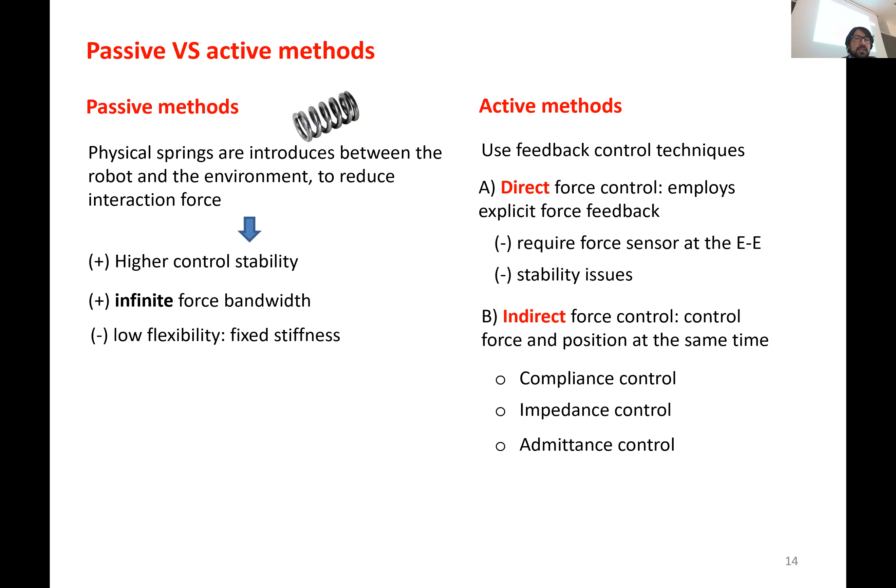And we can have compliance control in this category of active methods. We have impedance control, and we can have admittance control, which is the complement of the impedance controller, as we will see at the end of the lecture next week.

There are also hybrid strategies where you control position in one direction, and in the other direction you control force. This is generally applied when you have perpendicular directions in the force and in the position. It makes it easier if the directions are perpendicular.

So the active methods are way more flexible because you can just change your stiffness through software online. So you can have an adaptive stiffness in your system.

However, because you're adding an extra control loop for the force, there's a delay in the control itself, and this reduces the maximum bandwidth at which you can control the force.

So in legged robots, one key aspect when doing research on novel actuators is the maximum bandwidth that you can achieve in terms of force control.

We can reach bandwidths of 100 hertz in terms of force, and the higher the bandwidth you have, the better. That means that you can react to, for example, disturbances or impacts way faster and in a better way.

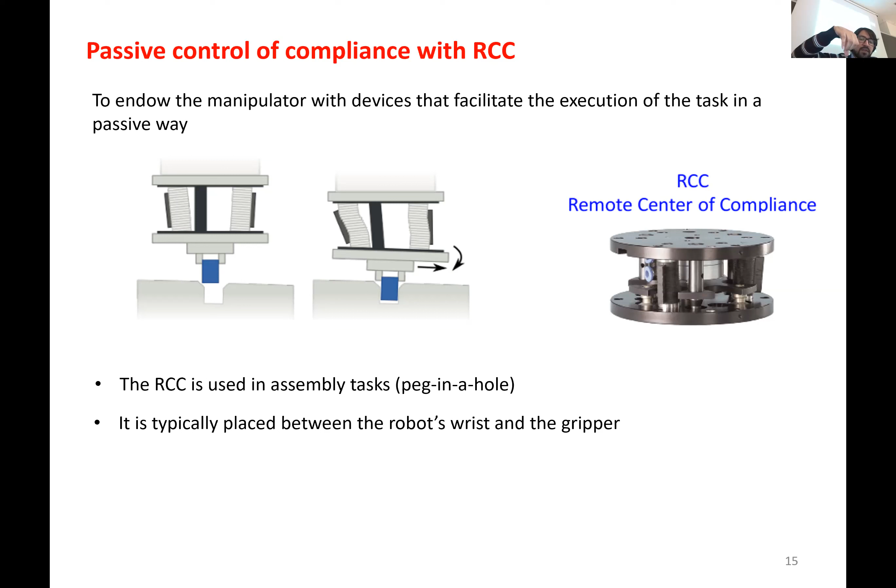It's used in assembly tasks, like the peg in a hole task, and it's typically placed between the wrist of the robot and the gripper to add this compliance to the end effector.

So the RCC allows movement in a plane perpendicular, and the newest ones also allow torsional compliance and compliance in the z-axis.

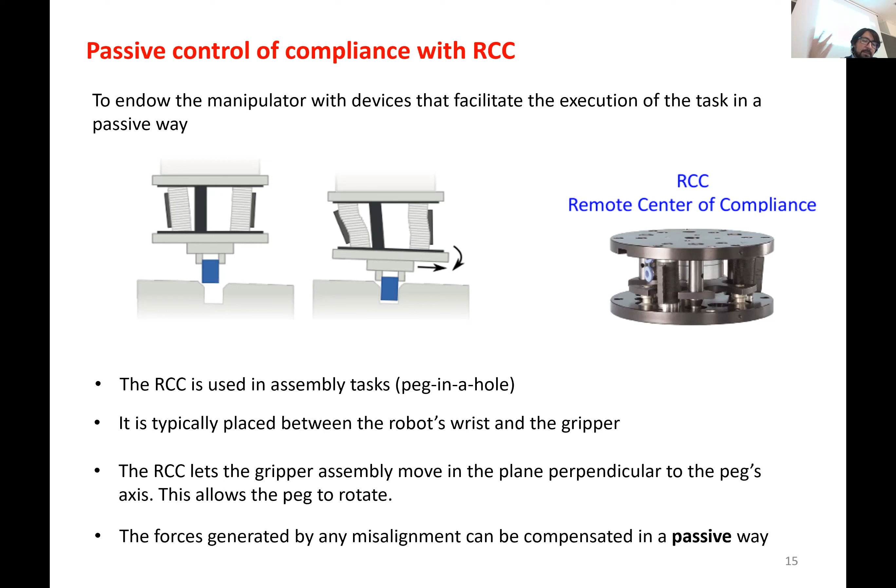I'm going to show you a video. The forces that are generated due to misalignment, as I mentioned, can be compensated in a passive way by this array of compliant elements.

So here's a newer model of this remote center of compliance called the Universal Compliance Compensator. It's made by the same company.

In this task, they have a magnetic gripper, and they are picking up objects from a box, and the objects can be misaligned with the gripper.

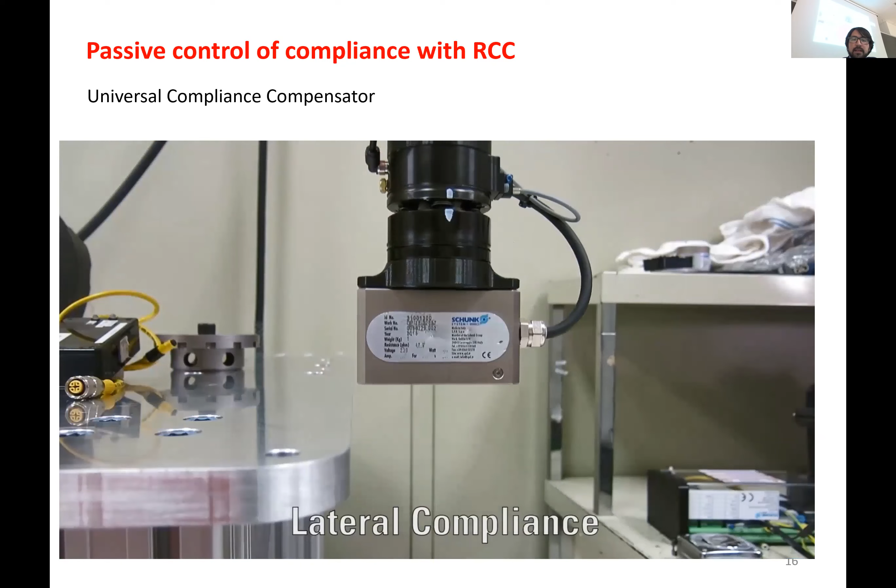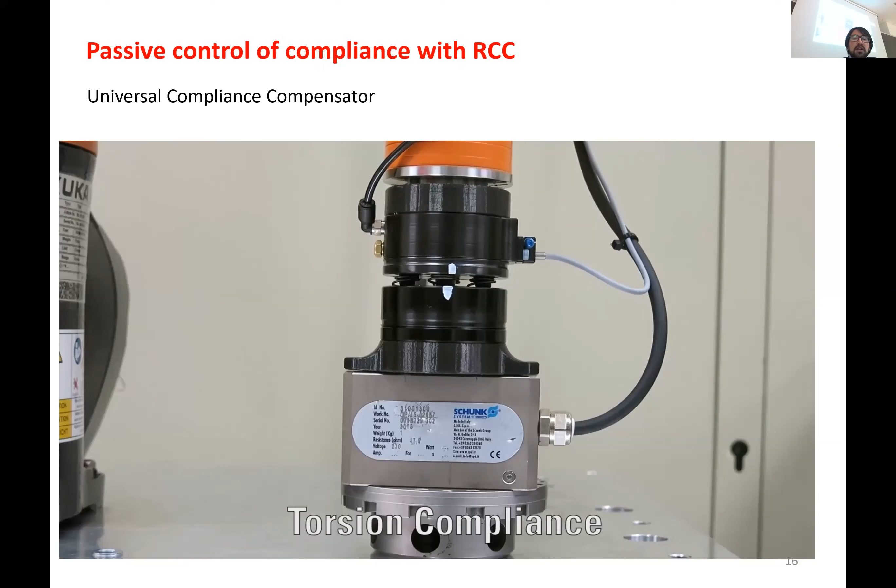As you will see, there's a bit of compliance at the Universal Compliance Compensator, and this is the z compliance that I was talking about. Then there's the lateral compliance in this direction, and there's also the torsional compliance, which is this one.

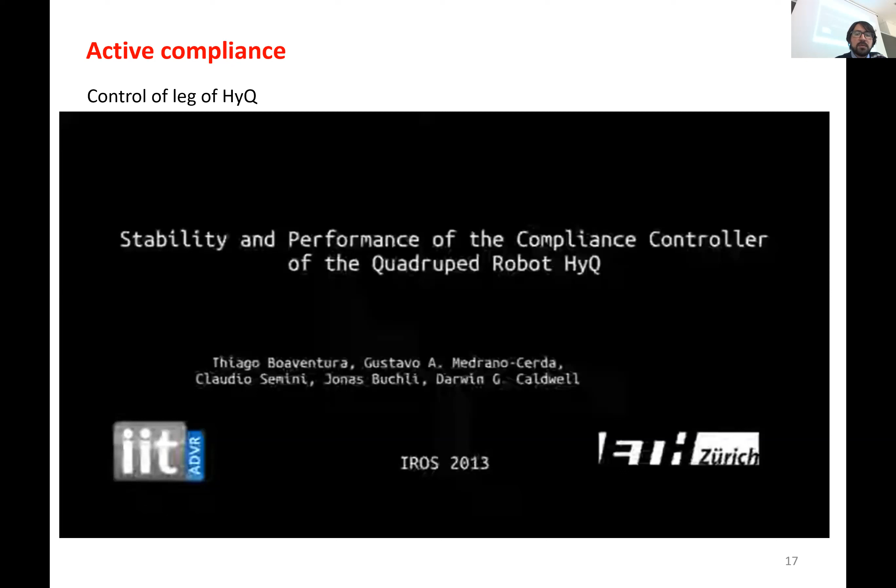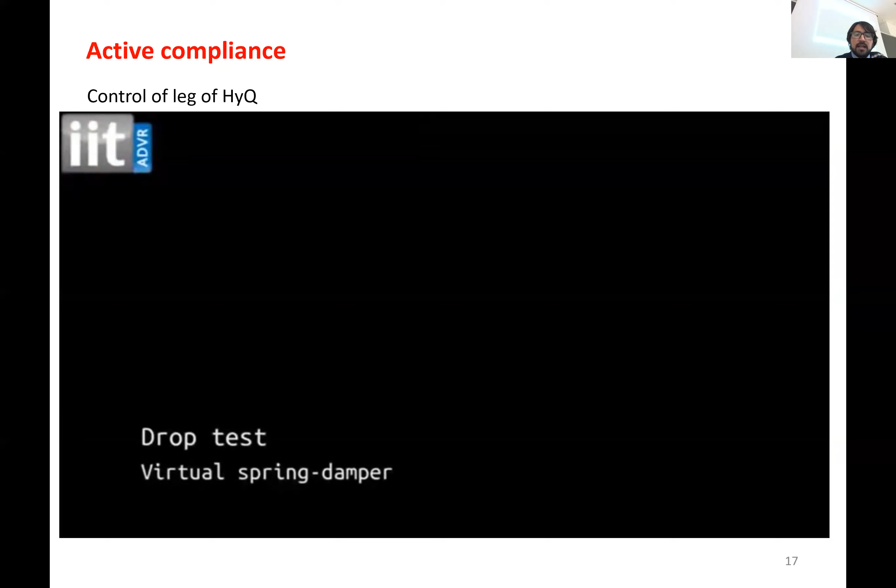Now, an example of active compliance. This is one of the first research papers of our lab, where our colleagues developed an impedance controller for the leg of one of our robots. This was in the first steps of when we were developing the controllers of our robot. At the beginning, you will see using the physical spring damper, so the passive strategy. And then we have our virtual spring damper strategy, where we apply torques at the joint level to reproduce the behavior of this spring.

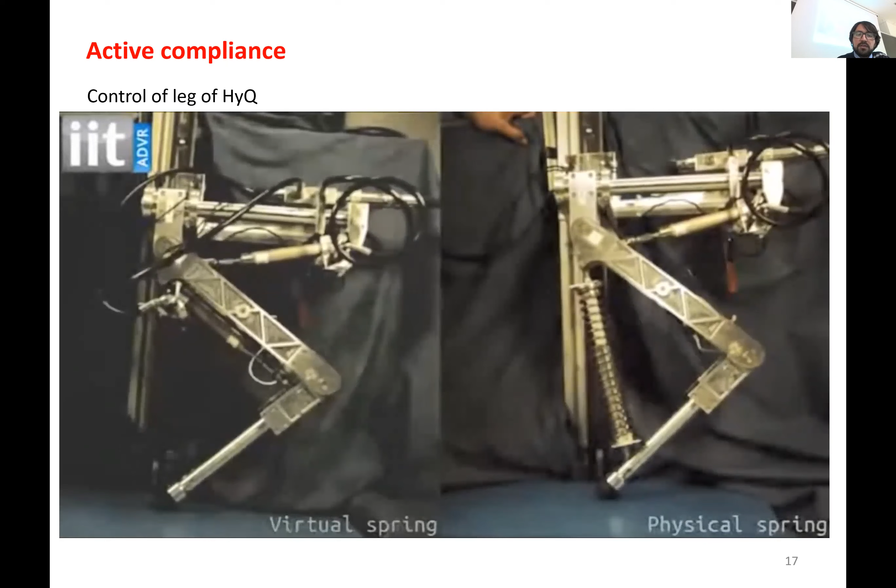You'll see in this video that they were able to reproduce the behavior of the spring with small differences. This was taken with a fast speed camera, so it's taking a lot of frames so that you can see in detail the similarities between the two of them.

So I'm going to finish this lecture with this one slide on direct force control, which is, let's say, the predecessor to modern techniques used for interaction. The goal is that we have a reference force that we want to track. So the idea is that we measure the contact force F, and if F is smaller than our desired force, we apply more force. If F is larger than our desired force, then we apply less force. It's quite a simple control loop.

So we define this F star control action, which is our desired force plus a K gain times the error in force. And then we can complement our control actions with all of the compensations that we've seen in the previous lectures.

We define our joint torques as minus, so we're mapping our F star to joint torques, and then we're compensating for the nonlinear terms in the dynamics equation. Notice that here we have a negative sign because this is the force applied at the end effector by the joint. So remember that in our equation, the term on the right hand side, the U, is positive, but those are the forces of the environment. That's why we have this negative sign on the J transpose F star.